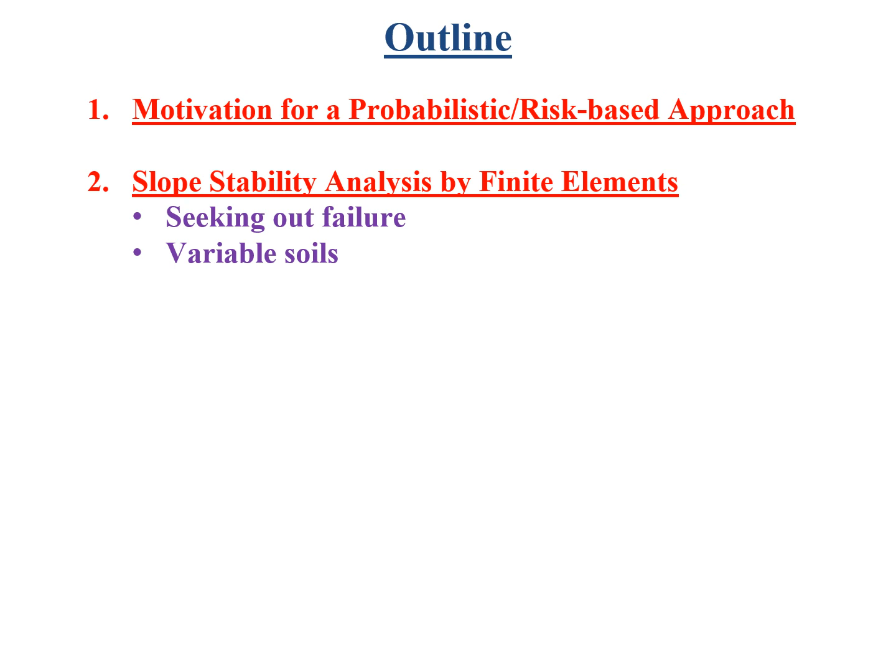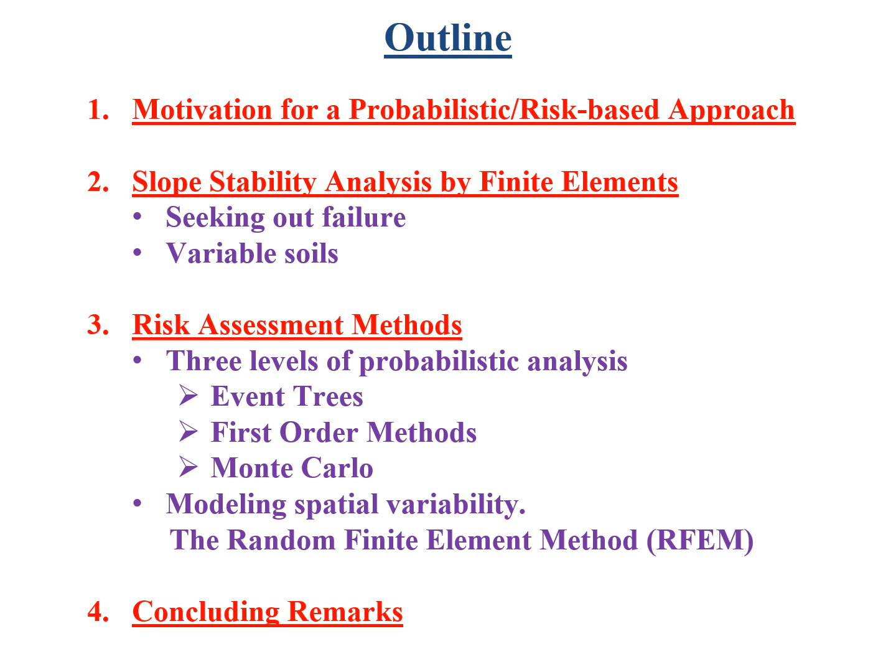And then I'll move on to a review of risk assessment methods in the geotechnical world. I'll probably define what I mean by risk before I start off on this stuff, but I'll identify what I consider three levels of probabilistic analysis, ranging from fairly simple non-mathematical methods through to something you can do on a laptop relatively quickly, to heavy-duty supercomputer stuff. So we won't be talking too much about that. Then I'll conclude with a few remarks at the end.

Juan Pablo mentioned that I spent time as a director of the ASCE, the American Society of Civil Engineers, and it's getting closer all the time, this target date of 2025. This document, which was delivered when I was on the board of the society, came up with what they thought would be priorities for civil engineers in the year 2025.

Maybe this was done about 5 years ago now. Most of it I found a little bit bland, perhaps a little bit lacking in detail, but one of them caught my eye, and I really liked that they recognised that in the future, engineers and civil engineers, all engineers, will have to perhaps consider and manage risk. Not only assess risk, but manage it and deal with it in a scientific way.

Leaders in public policy, well, yeah, we would like more politicians to be engineers, not lawyers, certainly where I live nowadays. The motivation for a probabilistic risk type... did something jump? Oh, this screen is sort of slightly differently adjusted, I think, with the projector.

I dropped off the Géotechnique panel as of the 1st of January this year, but for the very first volume of Géotechnique, volume 1, number 1, they asked Karl Terzaghi to write a preface. He pointed out something we all know but don't often confront explicitly: engineers have to deal with soil and rock where properties vary from point to point. The engineering properties are not uniform, and often we only sample the properties in a few limited places.

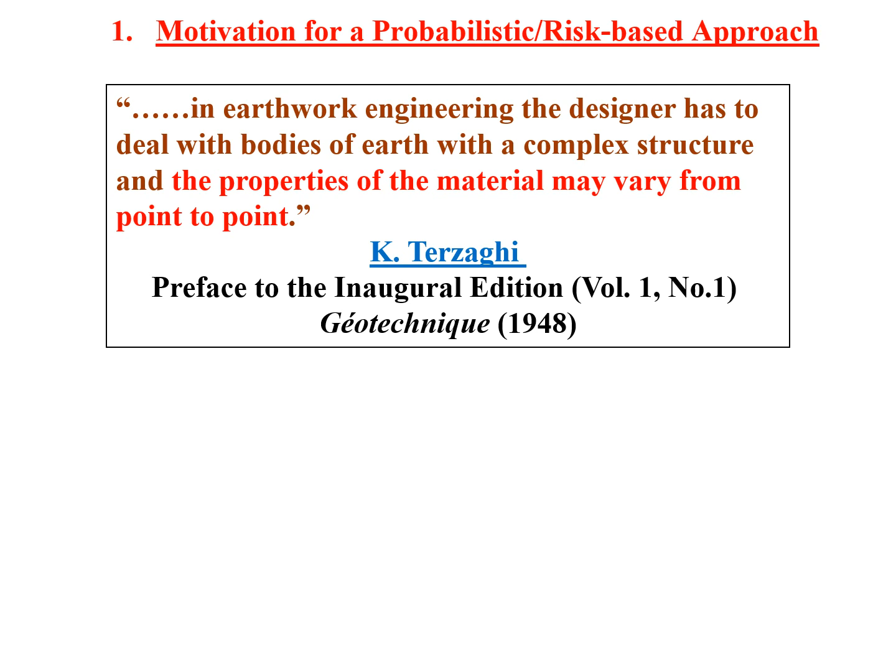The same year, many of you will know of a quite important book by Donald Taylor, from 1948. I don't know if it's a coincidence, but in his introduction he also talks about this variability that we have to deal with in the geotechnical world.

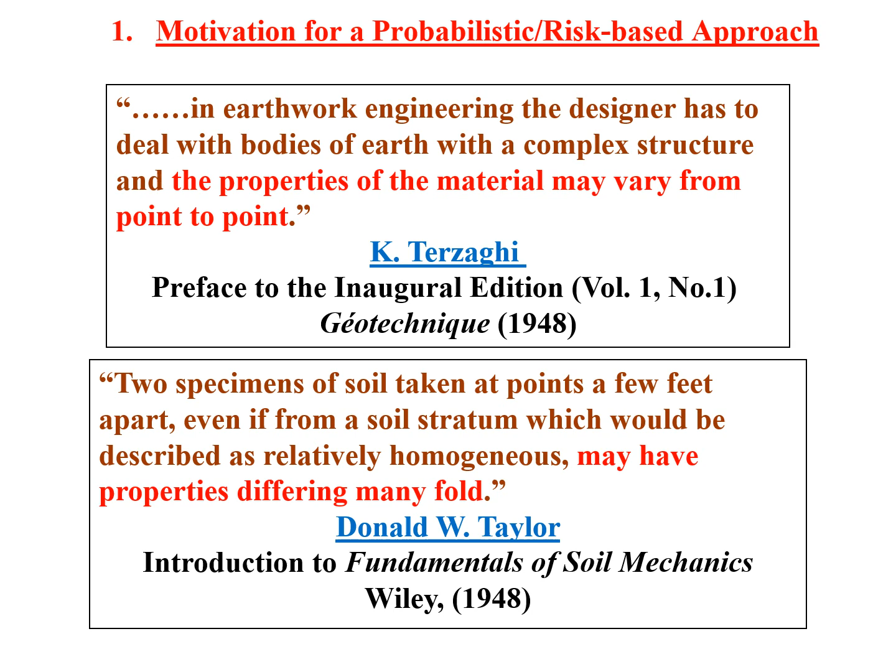I think there was quite a lot of rivalry in those days—it's a small world of geotechnical engineers in the academic business. Donald Taylor never got promoted, even though he has more things named after him, almost as many as Terzaghi, I'd say. You've probably heard of his consolidation methods and his slope stability charts. So it was a pretty tough political world, I think, in those days.

However, in spite of Taylor and Terzaghi's pronouncements, only fairly recently, in the research world at least, have we started to confront these variabilities explicitly through numerical methods. This is a method called the random finite element method, where we model the soil or rock using a finite element mesh, and the properties are defined statistically with a mean and a standard deviation. If you remember your probability and statistics—instead of giving the whole problem a single property, which is traditional geotechnical engineering where we slap a factor of safety on at the end, we'll actually try to explicitly predict or model the soil as a variable material.

This is a bearing capacity analysis which we did some time ago. You can see a grey-scale that somehow represents the strength—I think dark represents weak soil in this picture, and light represents strong soil. It's interesting to see the mechanism goes one way. When we do these things repetitively, sometimes called Monte-Carlo simulations, we very rarely get a bearing capacity failure that does the classical textbook, symmetric thing. It just never happens, because a weak point somewhere triggers the failure to go one way or the other.

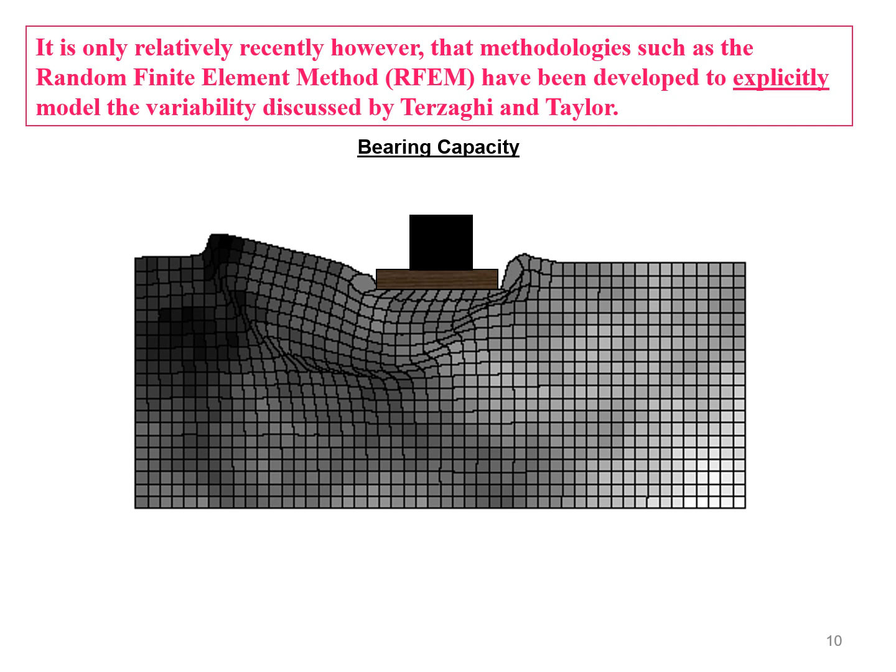I've thrown in a celebrated bearing capacity failure in Canada from a few years ago—106 years ago, actually. This, of course, as we can see, went one way.

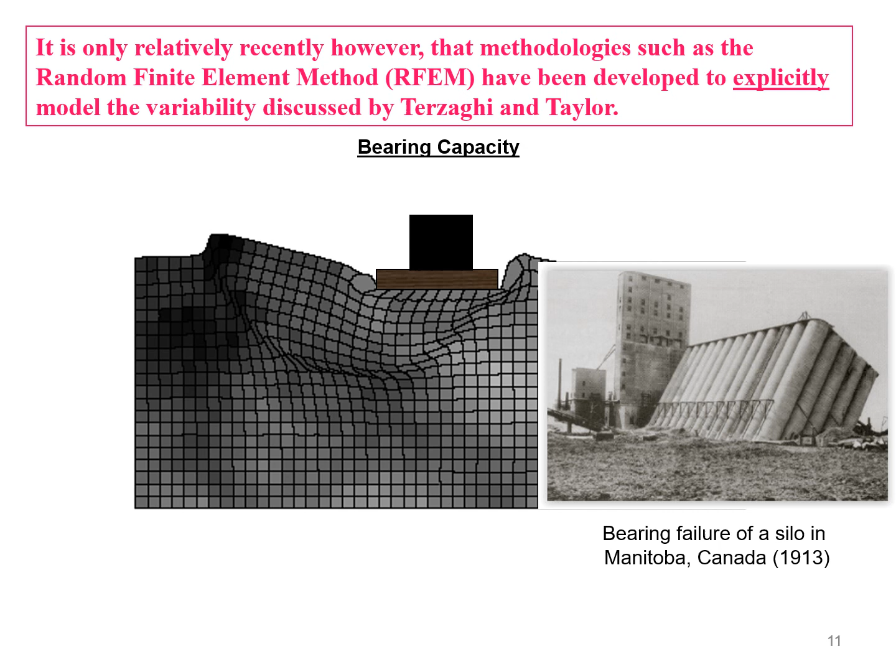Slope stability analysis by finite elements. I want to emphasize perhaps the power of the finite element method here for dealing with this variability that we all know is there.

Suppose we want to calculate the factor of safety of a slope. We can use limit equilibrium methods, methods of slices, or we can use charts—sometimes Taylor's charts—for certain simple problems, or we can use numerical methods like the finite element method. This is how it works; it's very simple and very powerful. You design your mesh to represent the profile of the slope.

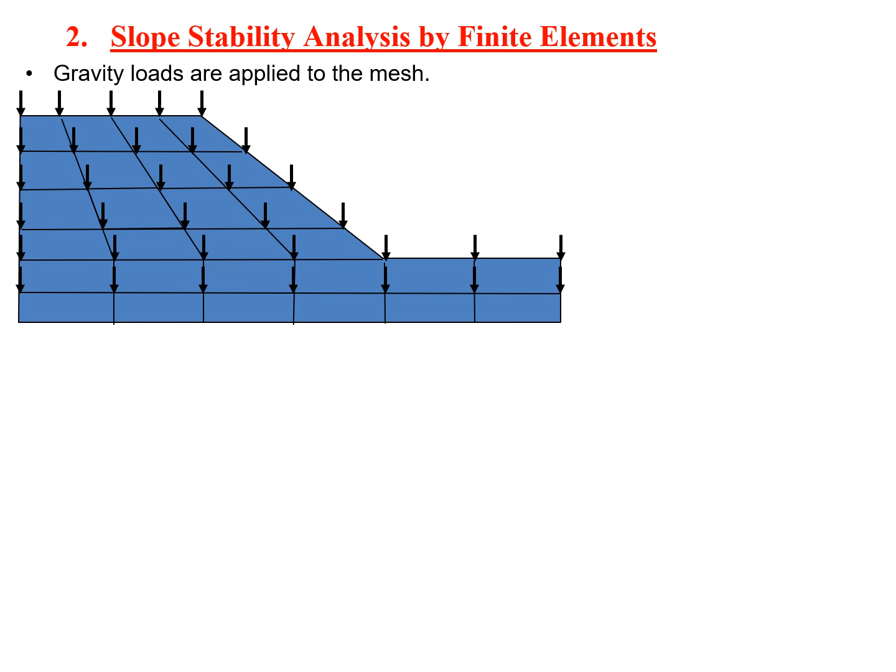It could be a lot more complicated than this, but I've got a simple slope. We turn on gravity, so to speak, since it's gravity that's driving the failure, if there is one. Then we give the slope, the soil, a rather simple stress-strain law—something elastic, perfectly plastic, this would be called. We assume the soil is elastic for a while, and then when it hits a threshold defined by Coulomb—friction, cohesion—it fails.

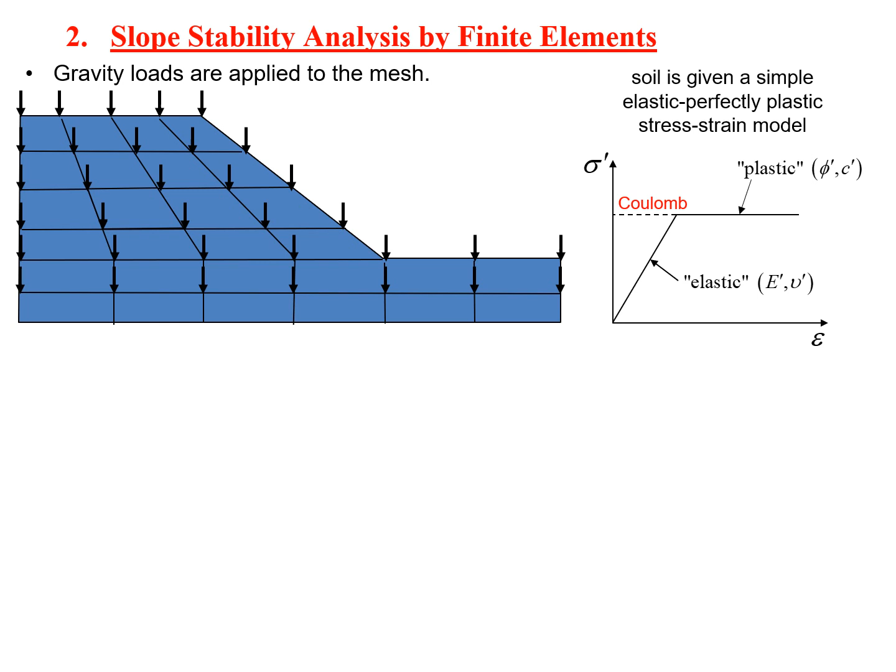So the way this works is we do initially an elastic analysis—we just forget Coulomb, we just do an elastic analysis with Young's modulus and Poisson's ratio. We look at the stress in each element, one at a time, to decide if the stresses generated by gravity have violated Coulomb. If they're above this line, they've strayed into illegal territory. If the stresses are below the line, we consider them still to be elastic, so we're not worried about those.

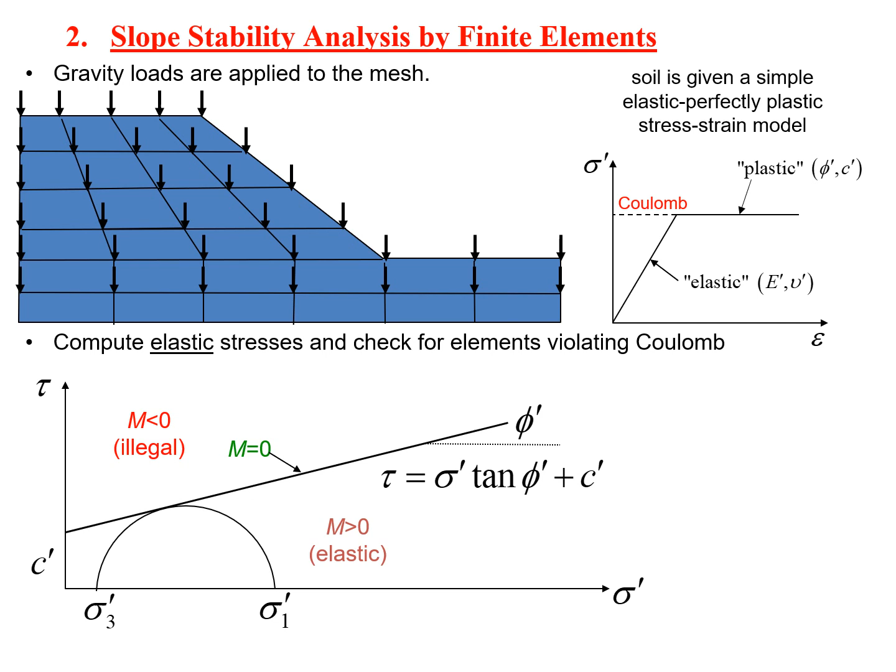So this is what happens: if a particular element violates Coulomb's criterion, negative in this case, then something has to happen. Stresses are not allowed to be in that part of the chart - they've exceeded the strength that is available.

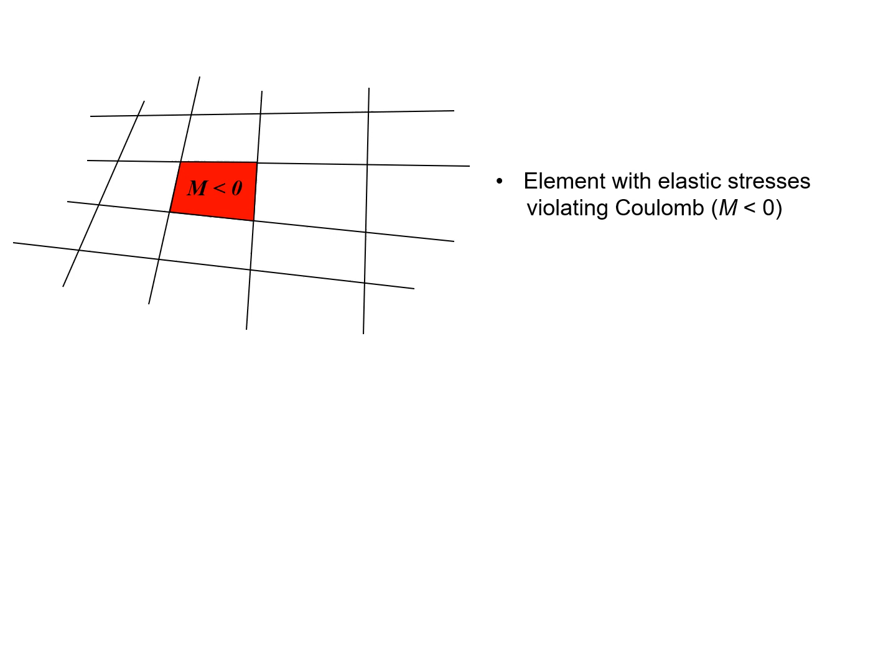So we then turn on a redistribution algorithm that tries to share the excess stresses with neighbouring elements. These are finite elements, each of these little quadrilaterals, and there's a fairly simple bit of programming that says, okay, let's try and get our neighbours to take some of this load.

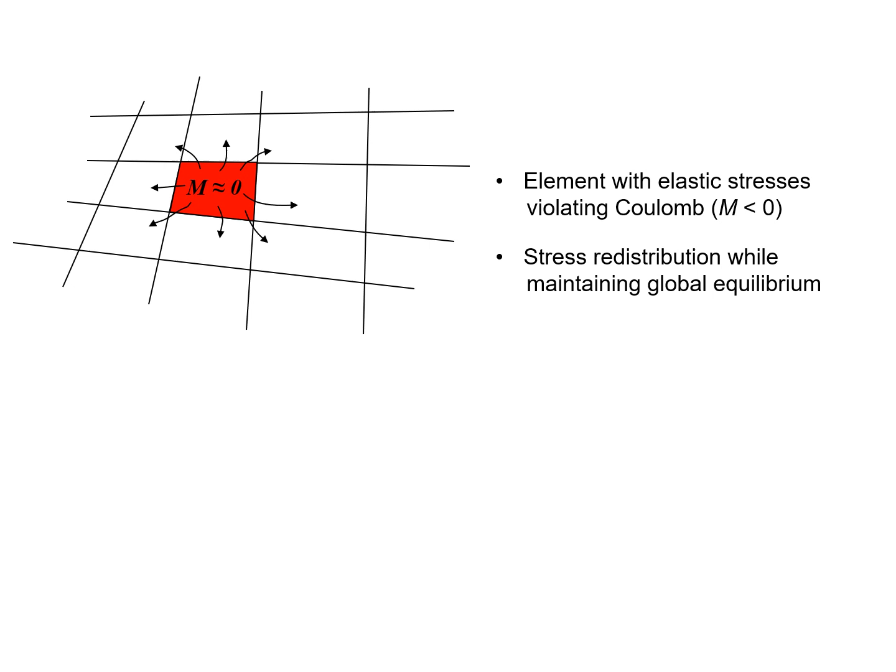In doing so, we may cause the neighbours to fail, in which case they will need another round of redistribution. So it's a redistribution algorithm - we're moving the stresses around, but we're not violating equilibrium. We must still be in equilibrium with gravity, but we're moving the stresses. After a while, hopefully, all the elements have returned back to Coulomb's line within tolerances, and we stop calculating.

To find the factor of safety, we keep gravity constant, of course, unless we're going to Mars or something. We gradually weaken the soil by dividing by something called a strength reduction factor, SRF. So we systematically weaken the soil, and sooner or later the slope's going to fail. Obviously, if you weaken it enough, it will fail.

And when that happens, it's easily shown, I'm not proving it today, but it's easily shown that the strength reduction factor is the factor of safety. What we see in our model is a very sudden increase in crest movement, a sudden increase in nodal displacements. So the strength reduction factor is increased slowly, and suddenly we get this failure - that's the factor of safety.

And we validated it against old, for simple problems - we could check the answers against established results in the literature and elsewhere.

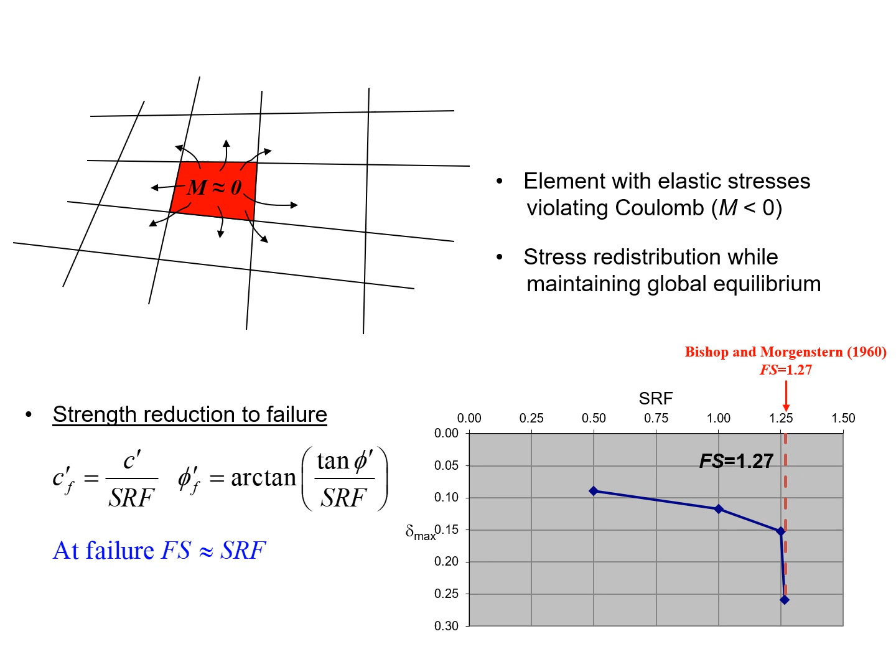The finite element approach seeks out the critical failure mechanism. You don't have to tell it where to look. I didn't have to, in advance, say look for circles going through the toe or tangents at this depth or anything like that. So the mechanism comes out of the analysis naturally.

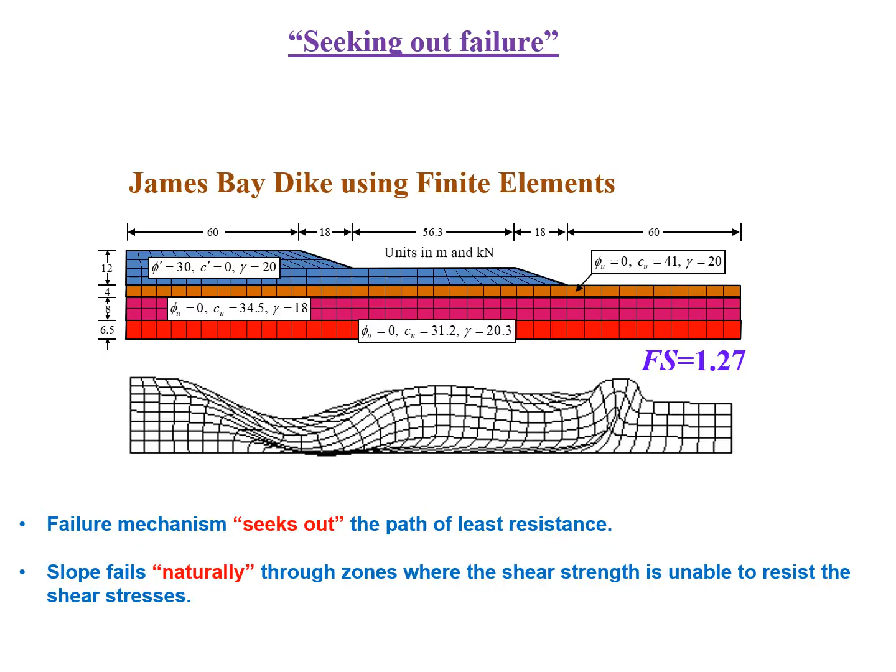A few other examples - this one is a bit more contrived. This is like a two-layer problem with strength reduction. So we're now reducing the strength of both of these layers at the same time until something fails.

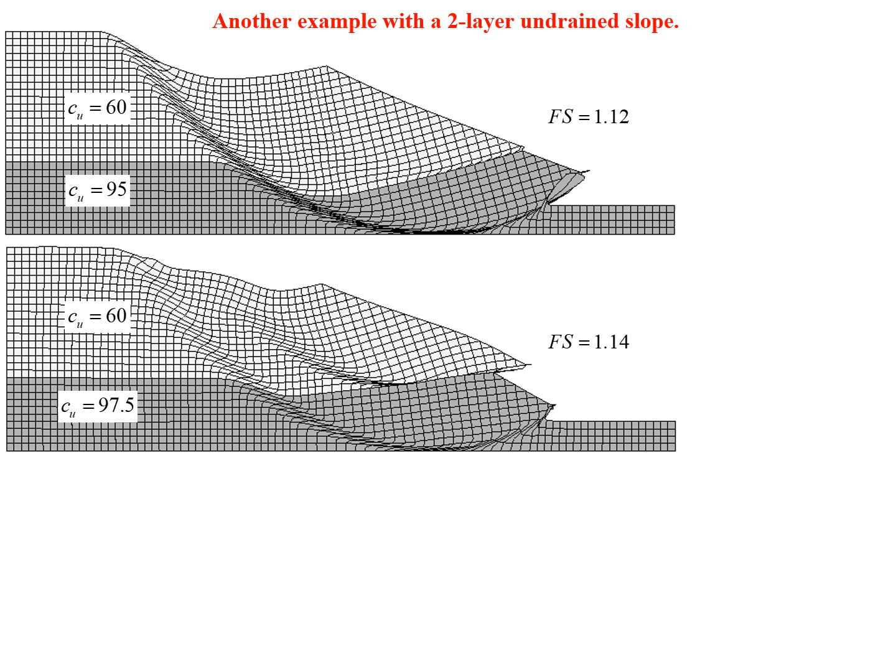If we increase the strength of the lower soil a little bit, and obviously I've chosen my numbers carefully to give this answer, but you can see we have two mechanisms with the same factor of safety - the shallow one and a deep one, both with a factor of about 1.14.

If I increase the strength of the lower soil once more, then essentially the mechanism no longer wants to go deep. It's harder work to get through that lower, stronger material, and it stays shallow.

My point here is the finite element analysis, and by the way, it's a program downloadable you can all have if you're interested, does this.

It naturally gives you those mechanisms. I didn't have to tell it to look for them. Just when I finished the run, I looked at the graphics and we see.

I do ask the question here: would a limit equilibrium method have found both those mechanisms necessarily? I think maybe in the hands of a very experienced practitioner, but I think most conventional slope stability analysis would have found one of them and said, hey, that's it, we've got the factor of safety, without realizing there's another equally likely mechanism of failure lying underneath.

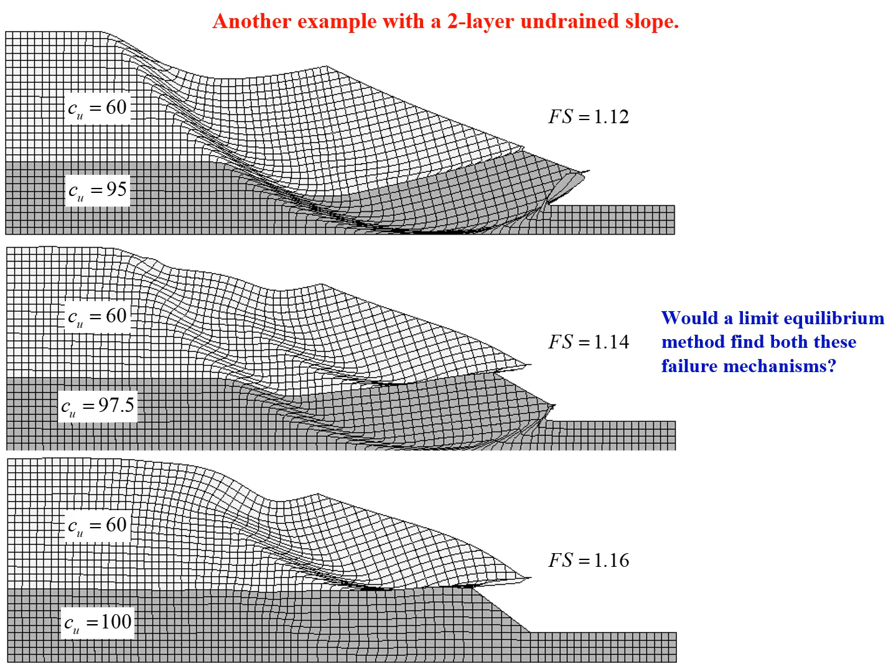When you get back into this random world of soil properties, which is much more variable than our little simple layered problems, we really have no choice but to go to numerical methods, because the mechanisms can be quite wild sometimes as they seek out a path through the weak soil.

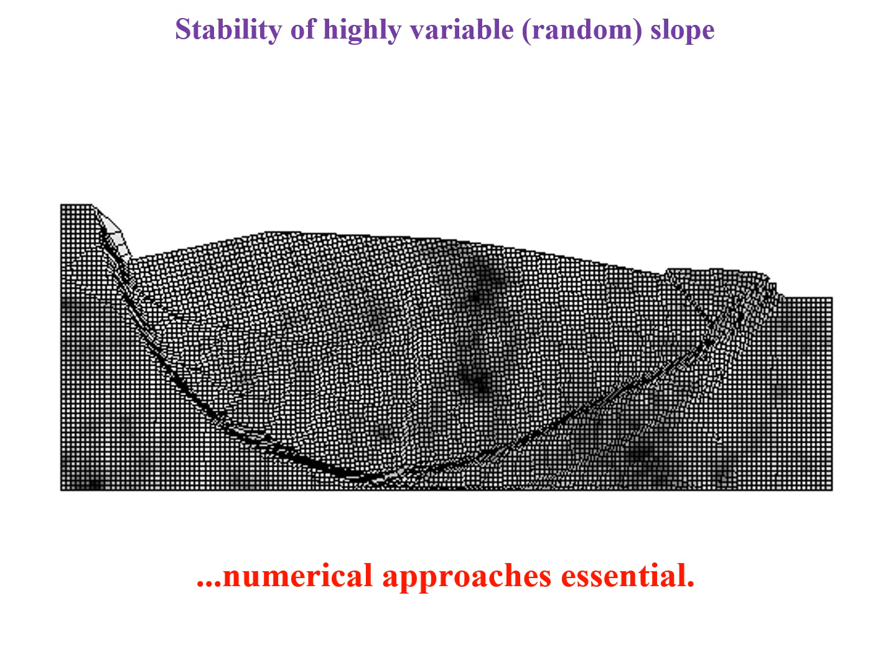Okay, so that's a little bit of background on slope stability by finite elements. Now, why would risk assessment, what does it add to the conventional approach?

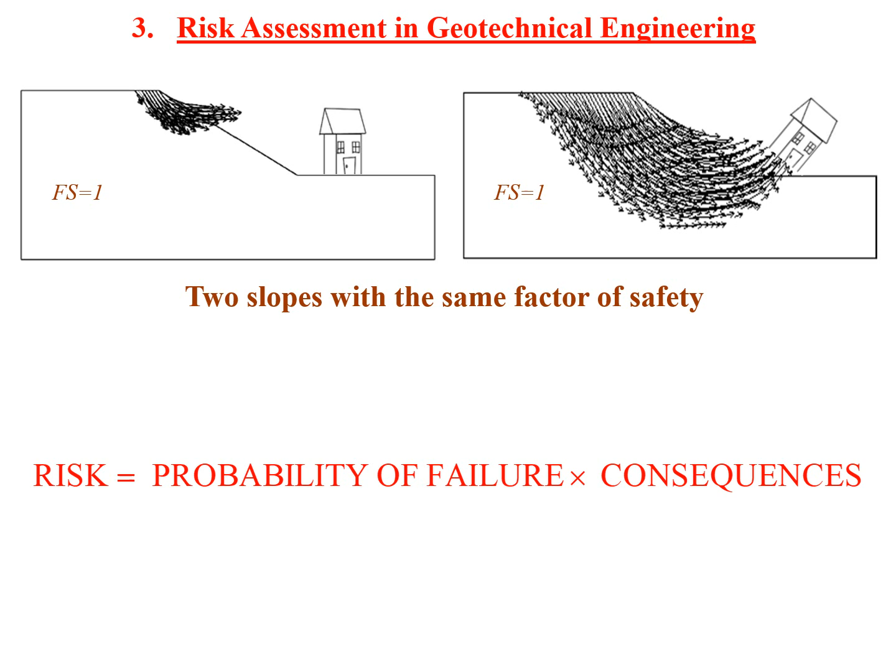Well, here's the conventional approach to slope stability analysis again. Two slopes, both have the same factor of safety. Both slopes have failed, both have a factor of safety of 1, but one is obviously much more damaging, potentially hazardous to the people living downhill, which raises the issue of consequences of failure. Clearly, the consequences of the right-hand event are much more serious in terms of cost, lives, potential loss of life, and so on.

So here's my definition of risk, a very simple one. It's essentially, risk is the probability of failure weighted by the consequences of failure. So, if the consequences are serious or very severe, we can only tolerate a much lower probability of failure. If the consequences are not so severe, we can tolerate a higher probability of failure. It makes perfect sense. The thing is, the probability of failure of anything is rarely equal to 0, and we always have to recognize that failure is possible, and we have to manage that level we could accept based on consequences. Consequences are going to be very site-specific. I can't just put in a textbook somewhere an acceptable probability of failure for a slope or a retaining wall or a foundation. It depends on what the consequences would be if that thing failed.

What is acceptable risk? This is a topic that I daren't touch on today, and I think it's a very difficult one to tackle. It's a different lecture entirely. Acceptable risk is something that perhaps society will have to buy into. How much are we willing to pay to reduce risk? What can we live with?

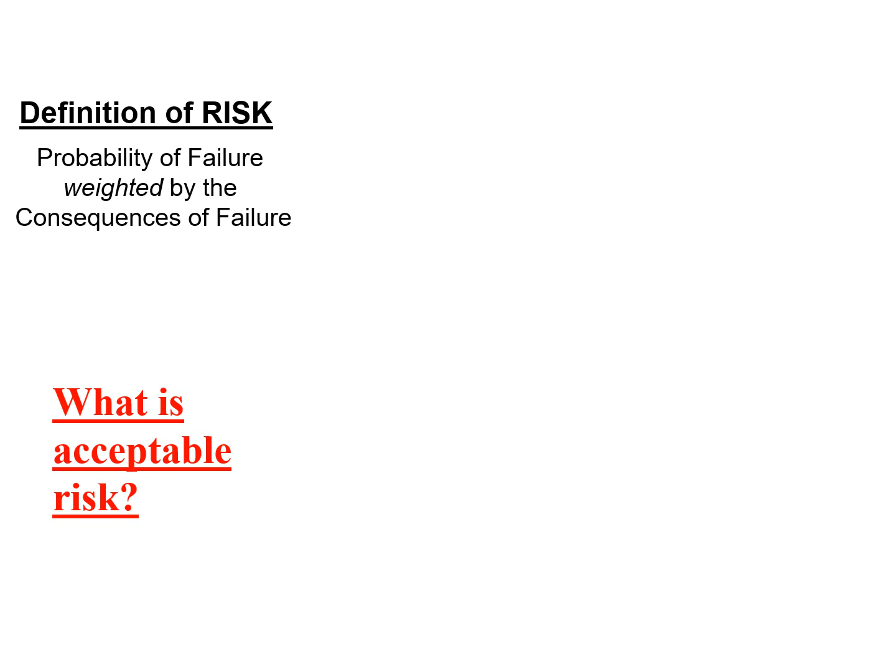Just to give you an idea of how this idea of risk pans out, this is a historic graph. I hope you can just about make it out. Baecher, in 1982, claims he developed this chart based on earlier work that was unpublished by other people. He doesn't want to take full credit for it, but it's one of the earliest publications of this type.

Along the x-axis is, in this case, dollars, cost of repair, infrastructure damage, and so on, and of course it's 1982 dollars. Up here is an acceptable level of probability of failure. So the y-axis is probability of failure, the x-axis is lives lost, dollars cost, and the top axis actually is lives lost, which raises another interesting controversial issue of how much is a life worth.

I didn't plan to get into this one, but if you Google it, you'll find a huge bibliography on this topic. I suppose when I mentioned it, the lives lost goes into logarithmic scale, you've got a tenth of the lives lost here, so I wonder what that is.

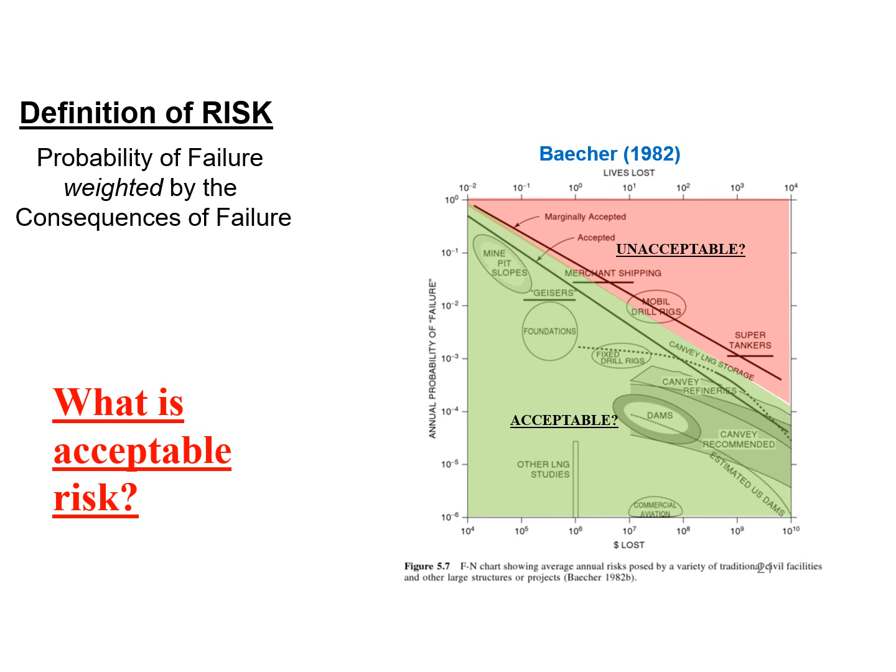So, it's broken arms. But these black lines are Baecher's chart, somehow defining the cut-off between what might be unacceptable and what might be acceptable for design. Unacceptable is high cost of repair and high probability of failure. Those two obviously don't go together. If the cost or lives lost potentially is very high, you've got to target a much lower probability of failure. Now this graph has appeared in many different forms from different agencies, but they all have a similar idea of diagonal lines going from the top left to the bottom right.

So a risk assessment study involves probability and consequences. I'm going to talk more about probability today for the rest of this lecture because the consequences are going to be much more site specific. How do we estimate probability of failure?

The probability of failure is somehow an alternative to the factor of safety. I think right now it's more of a complement. Nobody's going to abandon the old ways of doing things because they've served us well and generally safely. But the probability of failure, I think, is a more scientific way of thinking. The factor of safety is just an abstract number - it doesn't mean a great deal other than it's higher than 1, and you feel good about that.

But actually the terminology in the literature, in my experience, is quite variable. Some people would prefer not to talk about failure if it's, say, the probability of differential settlement under a building - something that's not terribly high consequence. We might talk about the probability of inadequate performance or the probability of design failure. Some more optimistic people prefer a glass-half-full way of thinking: reliability, or the reliability index.

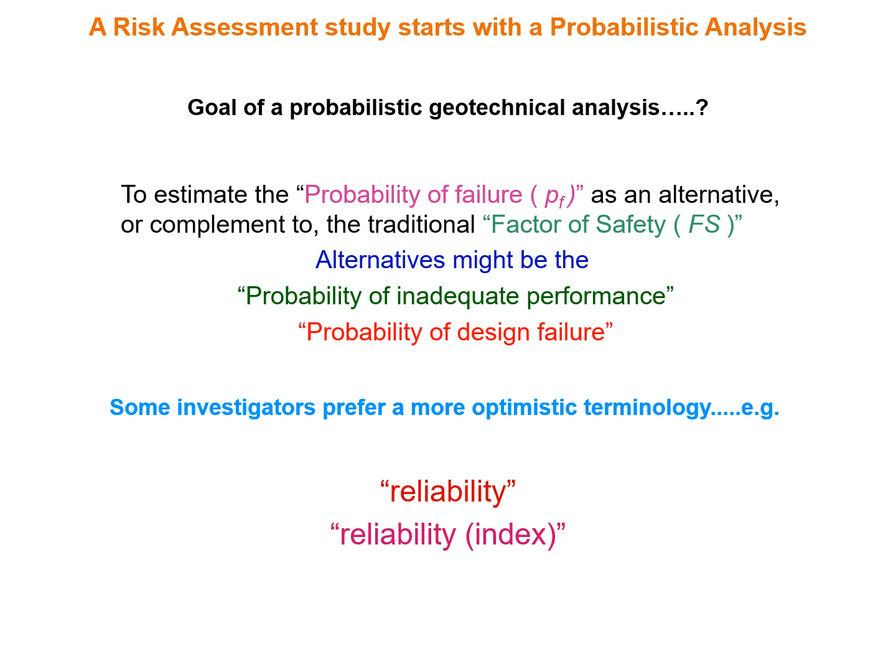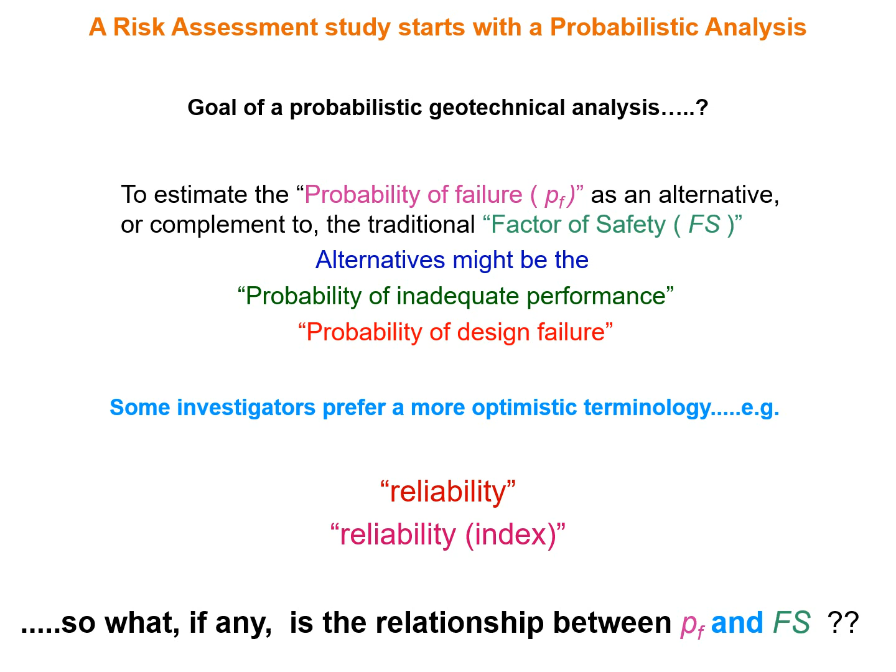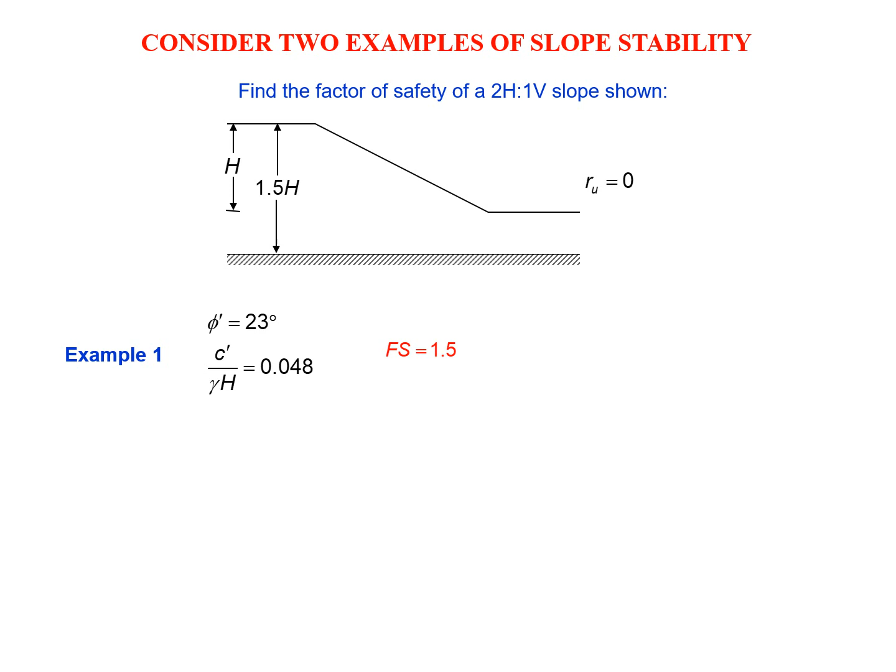So what, if any, is the relationship between the probability of failure and the factor of safety? This is a dangerous world to get into trying to compare these things. But I've got two slopes - this is a very famous example, you may have seen it before elsewhere. I took a simple slope and analysed it twice.

The only difference between example 1 and example 2 is that the friction angle is higher in example 2. Cohesion is dimensionless in this case, but the cohesion is constant, the geometry is constant, friction is higher. Not surprisingly, you don't need finite elements for this one - you can look up charts, take your pick, there's lots of choice out there. The second one, not surprisingly, gives a higher factor of safety. No one is going to be remotely surprised to hear that.

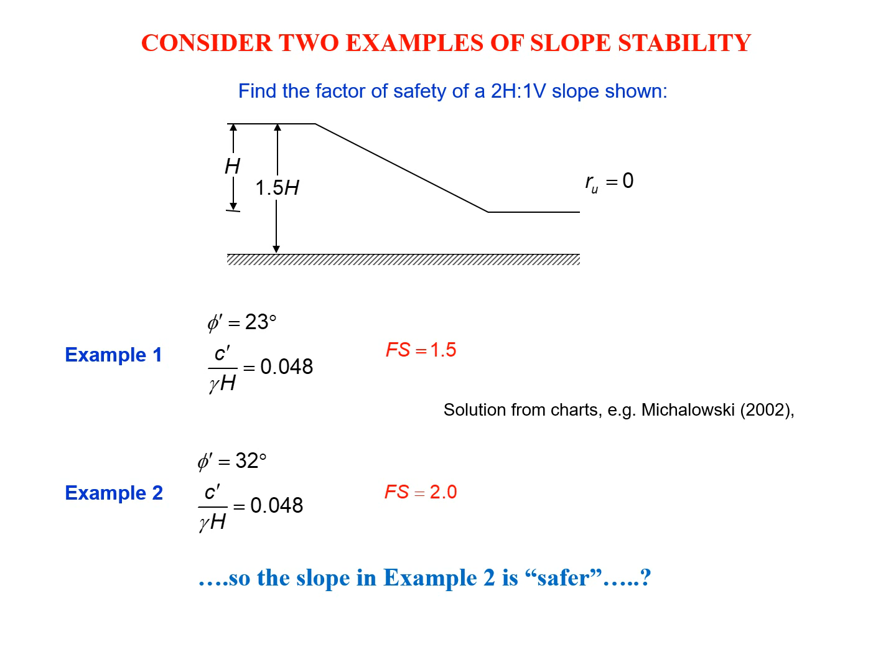And so, in conventional thinking, slope 2 is safer. You probably already guessed this is a trick question. Let's say someone goes off and says, hey wait a minute, this soil in this slope is not constant - it does not have a constant friction angle, it does not have a constant cohesion, it's variable.

And they do some analysis, a probabilistic analysis, which I'll mention briefly later. Following a probabilistic analysis, we come up with some more information about the variability of the soil properties. Some analysis has shown, for example, that example 1 has a mean factor of safety of 1.5 and a standard deviation of factor of safety of 0.18. I'm guessing you remember enough about your probability statistics that the standard deviation is a measure of the spread of results - how dispersed they are.

So really what this is saying is that the mean factor of safety is indeed what we calculated using charts just before. Example 2 gives a mean factor of safety of 2 and a standard deviation of factor of safety that's rather higher - significantly more spread out.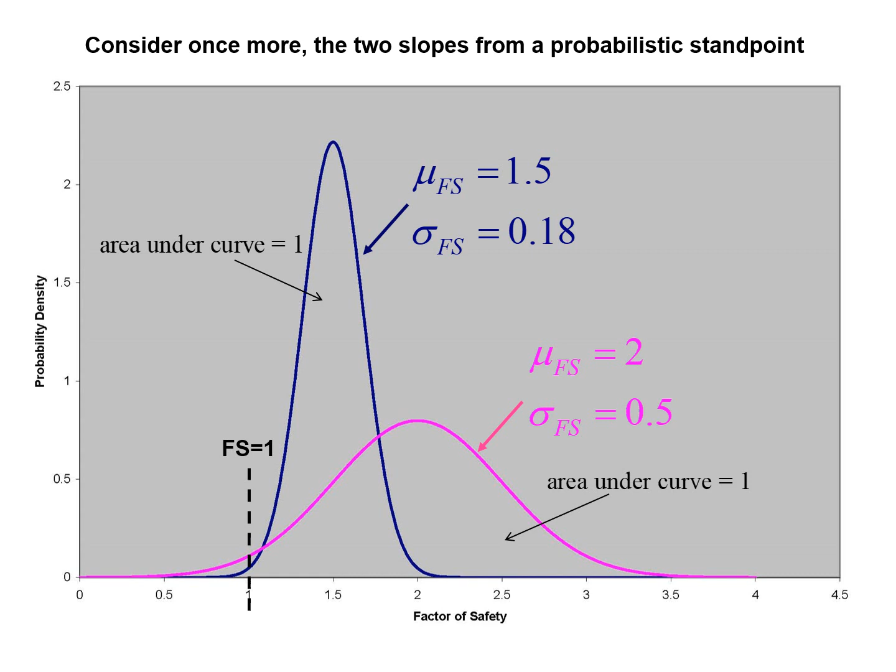And here's example 2, which is flatter and more sort of squashed out. If these curves are drawn properly - and this is quite important - the area enclosed underneath them is equal to 1 unit of area. This makes it rather convenient to calculate probabilities as areas. So the probability, for example, of the factor of safety being less than 1, which means failure, is the area of these curves to the left of the factor of safety of 1.

You can probably see what's coming. If I just look at a detail of that corner, we can see that the blue line, which has the lower factor of safety, has a smaller area - which means a smaller probability of failure - than the so-called safer slope, which is more flattened and has a higher probability of failure. So we get this counterintuitive result that's a bit unsettling in many ways: the safer slope has a higher probability of failure.

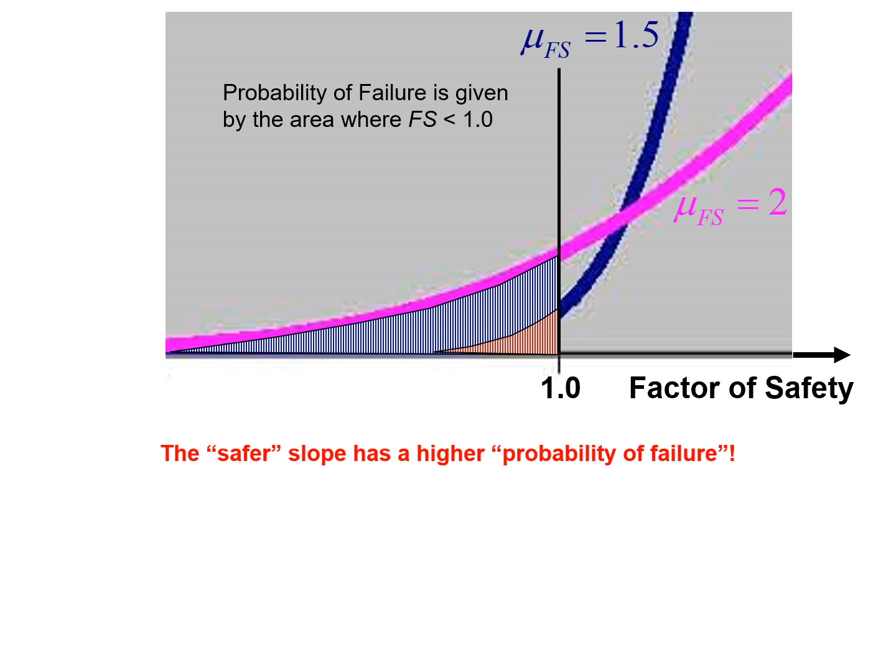Now, this is a contrived example, deliberately to make a point here. And the point is that direct comparison between the factor of safety and the probability of failure should be done with great care. In fact, they're apples and oranges. A factor of safety is a single number - factor of safety is 1.5. A probability of failure depends on at least 2 numbers, a mean and a standard deviation.

So I regularly see people writing papers where they're comparing probability of failure and factor of safety. And one has to say, well, you need a lot of small print caveats here to explain under what circumstances you're doing that.

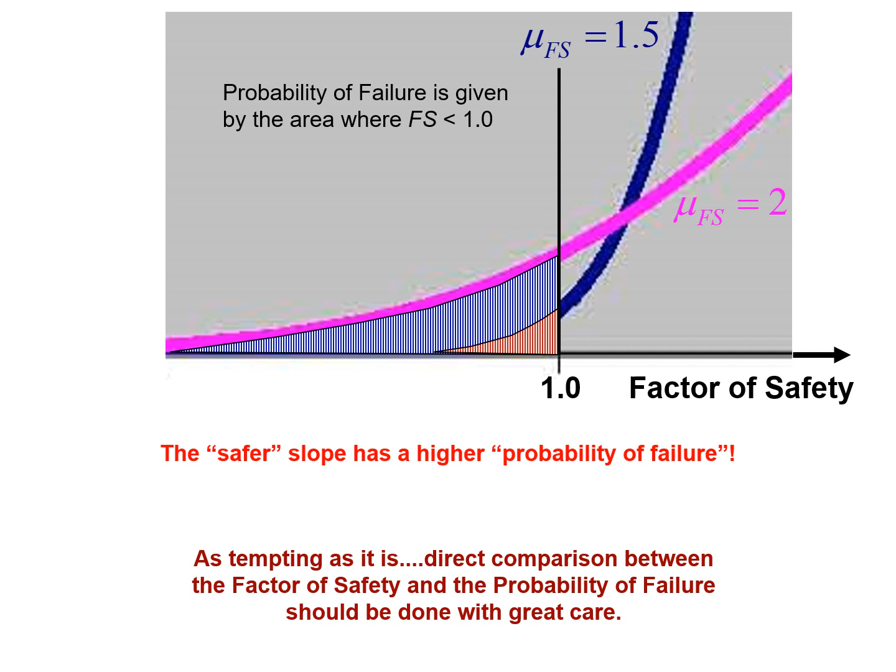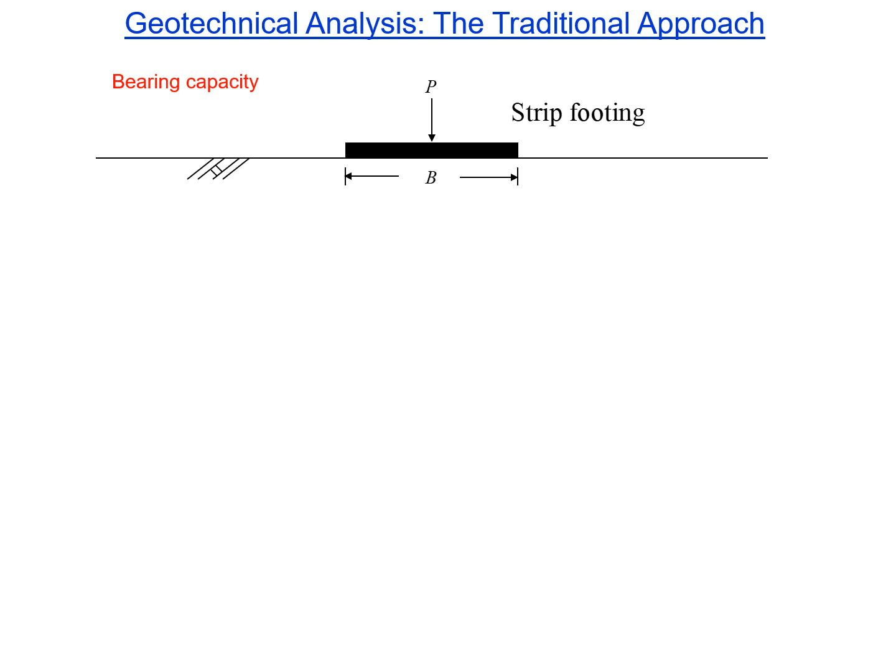How do we calculate this factor of safety? How do we calculate this probability of failure? Let's recap using that bearing capacity problem - a classical soil mechanics undergraduate problem.

So we have the traditional approach, visible at the top here: a footing with soil with certain friction and cohesion, chosen conservatively in some way with characteristic values. We plug them into a formula like Terzaghi, we calculate the bearing capacity, look up the bearing capacity factors, get the calculator out, and we work out Q-ult.

Then what we do is divide by 3 or something like that, a typical factor of safety for a bearing capacity problem. We end up with an allowable value which would be given to structural engineers - okay, you can safely apply this pressure to our footing. That's the traditional approach.

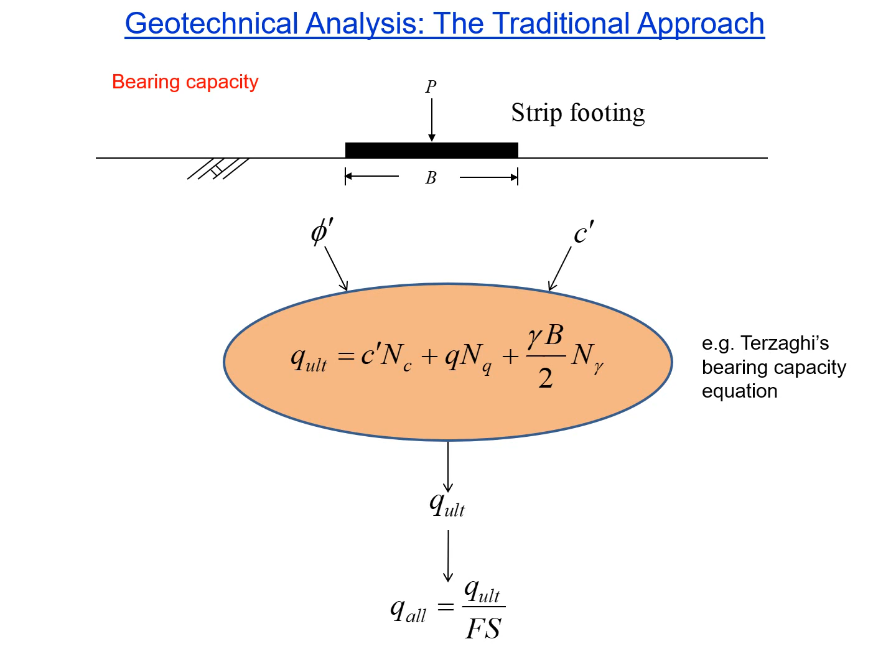We're still going to use Terzaghi. We don't want to change the models we've been using - not now anyway. But now we might need means and standard deviations from the book. We want to know how variable these properties are coming into the formula. And in here we have a probabilistic method.

We'll mention briefly one or two ways of doing that. But instead of calculating the bearing capacity like we did in the previous slide, there's a couple of other things here - we're now going to calculate the mean and the standard deviation of the bearing capacity. So probabilistic stuff coming in, probabilistic stuff coming out.

These blue comments are for a somewhat more sophisticated analysis. For example, cross-correlation says that these variables coming in may not be entirely independent of one another - they may be correlated in some way.

But spatial correlation recognizes that soil properties, if you take two samples in a field that are close together physically, are more likely to give you similar properties than if you take boreholes in opposite corners of the field. So the stratification, the depositional history, tends to give you a spatial effect. But these would be reserved for a more advanced analysis.

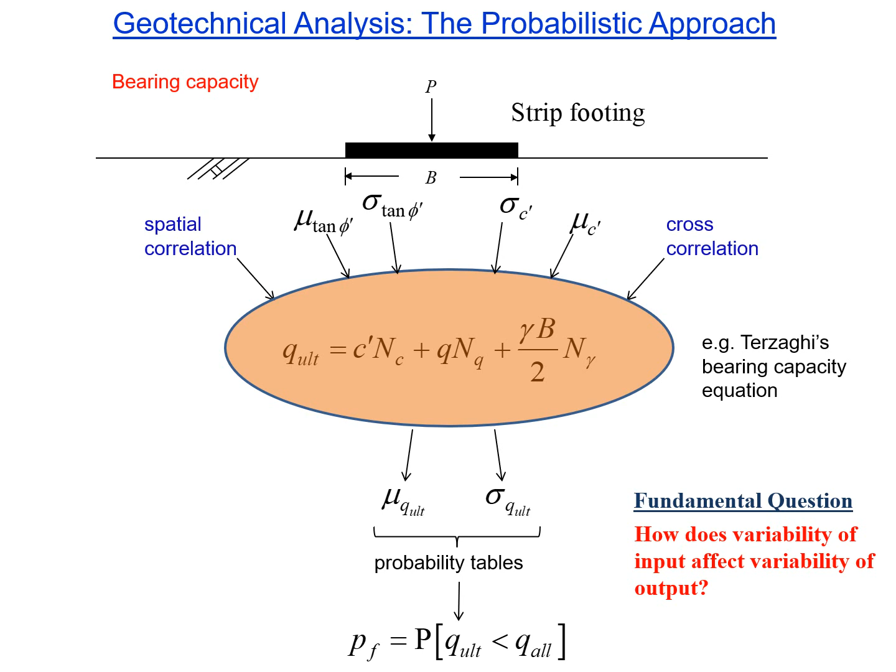So here's the key thing for any probabilistic analysis, I think: how does variability of input affect variability of output? Where do these means and standard deviations that we use come from?

That's a good question, because geotechnical engineers are always complaining we don't have good enough site investigation, right? Today, how on earth are we going to get standard deviations? Well, of course, there's no substitute for a good, thorough site investigation where you have enough data to actually calculate a standard deviation. But in the absence of high-quality data, we would initially recommend resorting to what we might call typical values of variability in different soil properties.

There's a growing bibliography of this. If anyone's interested, I have a list of papers and books and things that just give you a ballpark feel for how variable different properties are.

This is actually a very good, very pioneering work from Australia, this book called Lee, White and Ingles. But there are more recent ones, long lists of properties and typical ranges of variability.

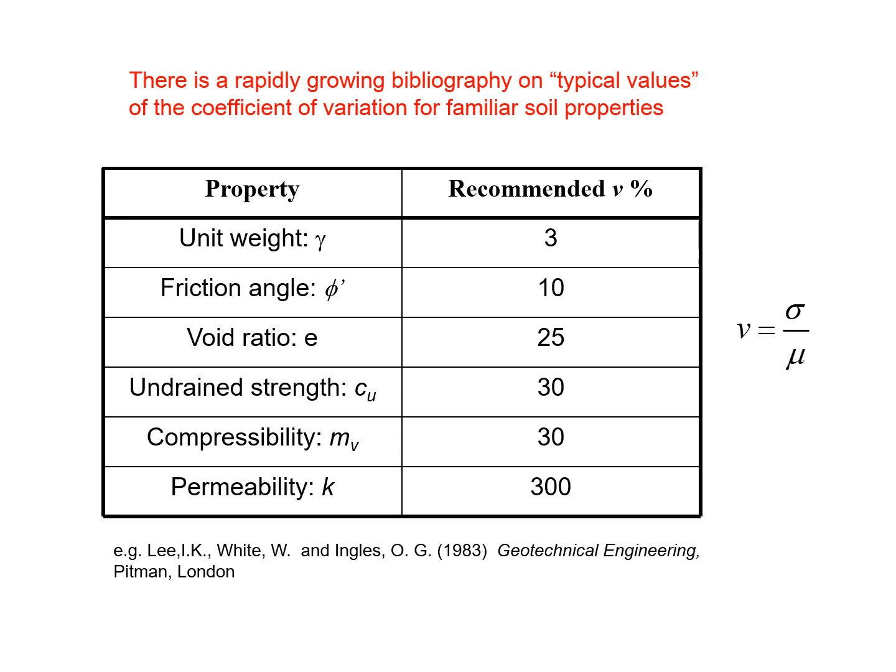I'm going to talk about three levels. One, called an expert panel. This is where a group of experienced engineers and scientists related to the project sit around the table and construct something called an event tree. I'll show you a very simple one in a minute. An event tree involves these experts trying to assess what they think the probability is of various things going wrong in a design. It sounds subjective, but it's actually based on many years of experience. These people should be seasoned engineers with lots of training in their discipline.

A powerful and very simple method that involves a little bit more calculation. The first one involves no mathematics at all, really, based on experience. And this is the one that's in state of practice, largely. Just down the road in Golden, Colorado, there's the US Bureau of Reclamation, responsible for hundreds of earth dams, mainly west of the Mississippi. Corps of Engineers have tended to be more east of the Mississippi, but they're regularly doing event tree calculations on existing dams re-evaluated for liquefaction risk and things like that. First order methods are becoming fairly routine. This involves a laptop or a calculator that can take a few seconds, but involves some calculation and delivers the probability of failure of the design.

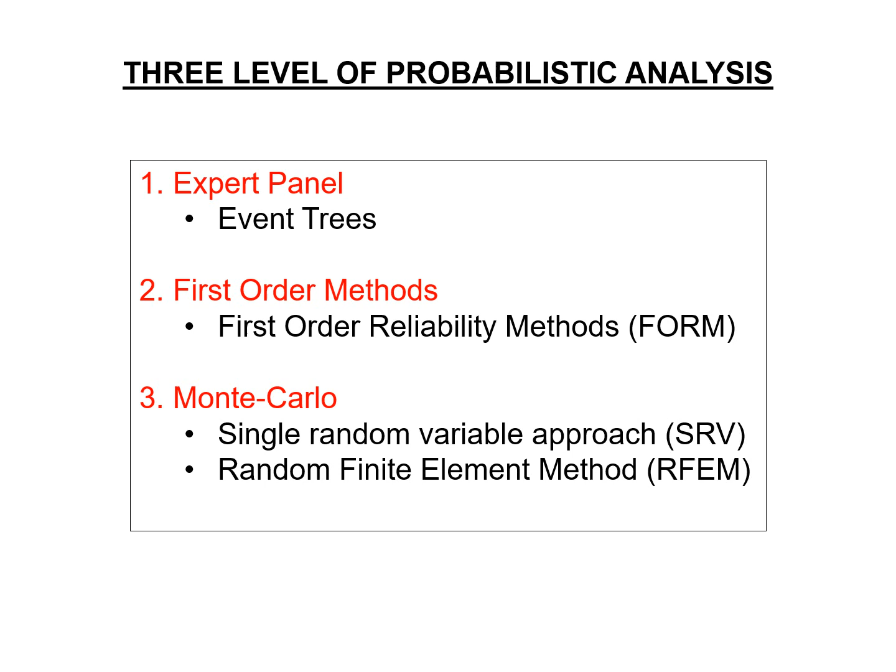FORM. And the third one is the Monte-Carlo family of methods, where you just crank the handle over and over again with variable input. You keep on calculating until the output quantity you're interested in starts to settle down statistically. You've done it enough times that your output is starting to stabilize. I'm just scratching the surface here, but this is a simple Monte-Carlo—I'll show you a quick example of that. And then this so-called random finite element method I mentioned at the beginning is also in this camp, but involves a bit more computational effort.

So, expert panel. This is one I pinched from the Bureau of Reclamation in Colorado, but I edited it a bit to take out a few names and things. This was actually a re-evaluation—sorry, the writing's a bit small—of an old dam, maybe 80 years old, in the northwest. They were worried about a liquefiable layer existing under this embankment, and the danger of an earthquake coming along and causing liquefaction.

So the panel sat down and tried to thrash out the things that might happen and the things that might go wrong. Just to give you a quick flavour, the starting point, the red blobs are bad things happening. If all the red blobs join up, then you're in trouble. The first question they ask is, based on some limited site data, what is the probability that the layer of liquefiable material is continuous from upstream to downstream? They decided there was a 70% chance that yes, it was a liquefiable layer that potentially existed underneath this thing.

No, 30%. This is called a tree because you've got branches coming off branches. One golden rule of an event tree is that the probabilities on all the branches must add up to 1, or 100% in this case. So you must cover all the bases and make sure you've got every possibility, and if the questions are reasonably simple, to be a yes or a no.

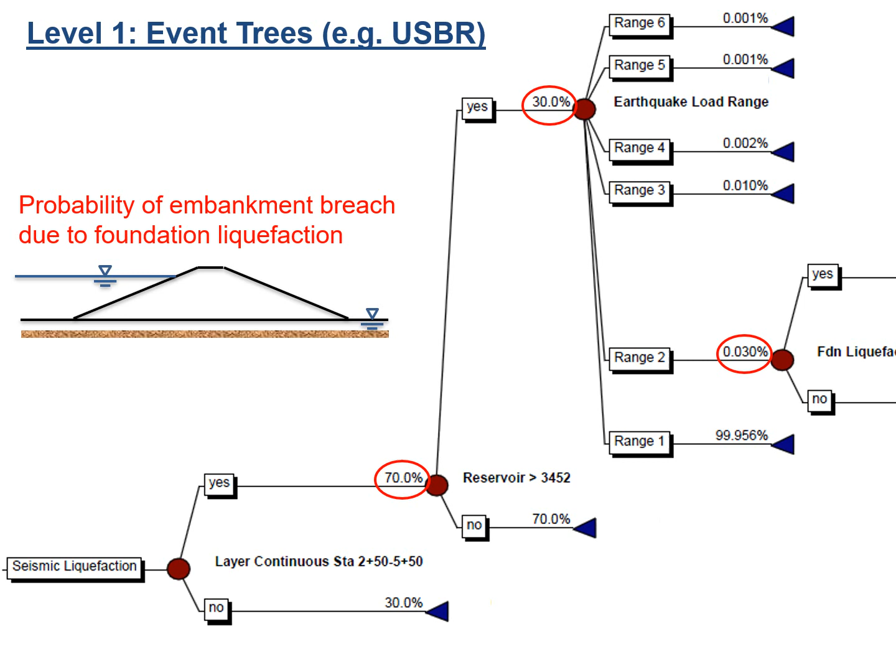An earthquake in Washington State, which gets earthquakes, but it wasn't a particularly active area. And then these are the circles. Then they said, well, will that layer liquefy? Maybe it won't liquefy just because there's an earthquake.

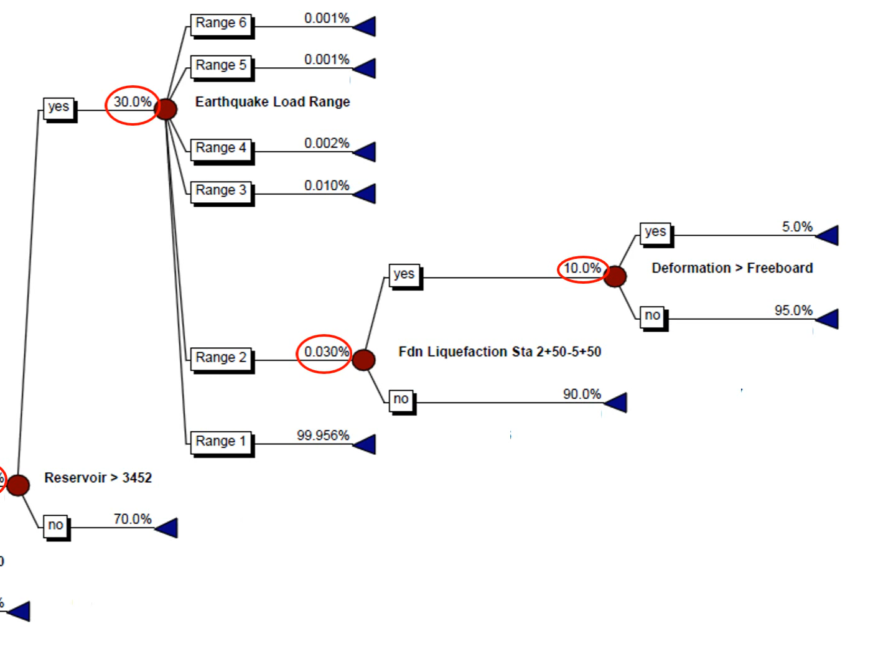Finally, here is my truncated version. If everything bad happens at the same time, then what's the probability that the crest will deform more than the freeboard of the reservoir, which would result in a release of water? So that was considered to be 5%.

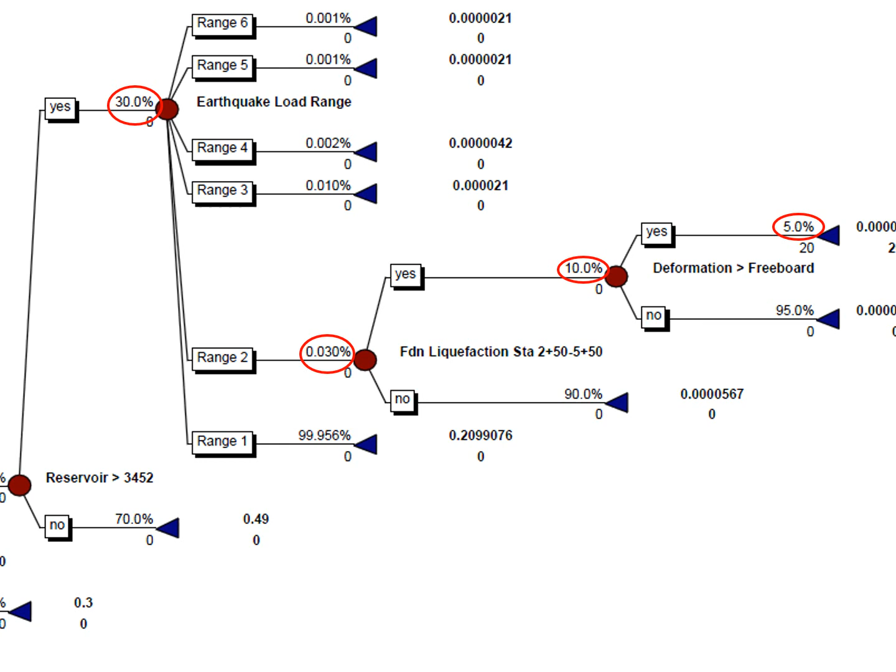So this actually was a much longer thing that I cut down. At the end of it all, assuming all these events are independent of each other, which is a statistical term, but if they're all independent, then the probability of failure of overtopping is just the product of all those numbers circled in red. Just multiply them all together.

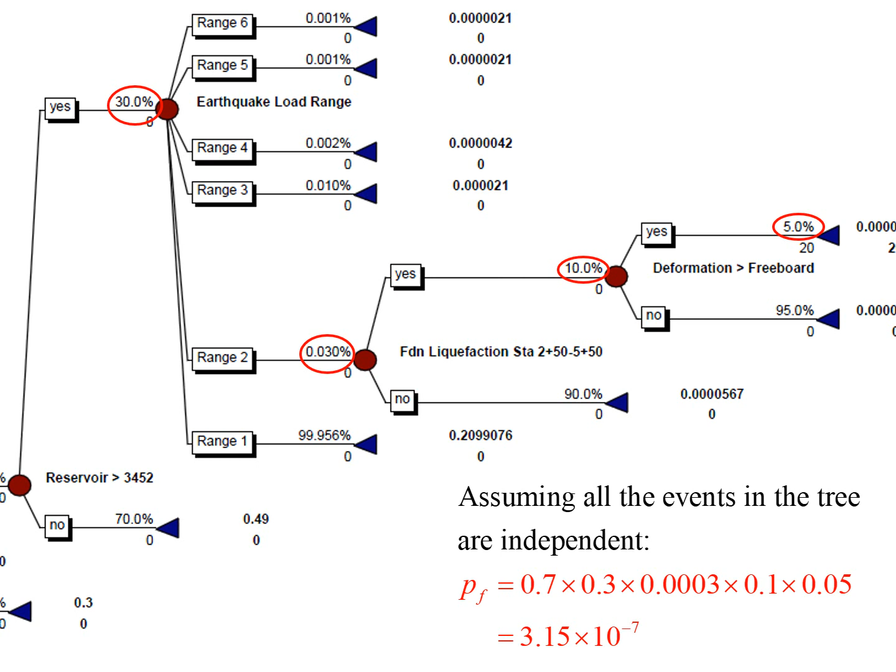You shouldn't really use percentages, it's better to use absolute numbers, so I'm not using percentages up here. But in this case the number was very small, and I think this would have been quite acceptable to them at the time. By the way, I don't really take much credence in these numbers here. Nobody can possibly nail it down. But that's the most important number. If some design changes that number to -6 or -8, then we're already onto something. So this methodology is very much used in practice to estimate probabilities.

Second, first order reliability, and I realize we've run a little short on time, so I'll push on. First order reliability method is based on - I've used Excel on my laptop. Again, the programs are downloadable if you want to play with them. This is the bearing capacity problem.

Without going into some of this stuff, I'm saying that the Q allowable for this footing must be 300. You should not apply a load of more than 300 kilopascals in this case, Q allowable. However, the properties here are variable. Unit weight I'm not going to deal with - that's pretty constant compared to some of these other properties. So cohesion and friction are going to be treated as random variables with means and standard deviation.

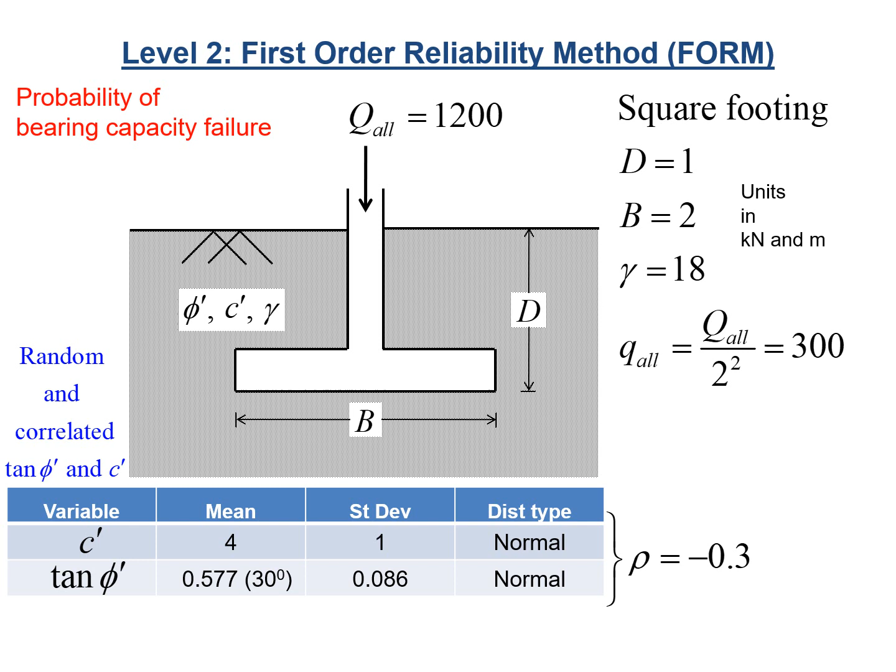Distribution types, well, lots of choice here, but we'll stick with normal, the nice symmetry. So I've also thrown in some cross-correlation just for fun, but some people think that the friction angle and the cohesion are negatively correlated. That's controversial. That is to say, when the mean of the friction angle is high, the mean of the cohesion tends to be low, and vice versa. Maybe some data has suggested that.

So our main question today is: what is the probability of the bearing capacity of this footing being less than 300? If we're unlucky enough to have weak soil that happens to lie underneath this footing, that would have to happen. By the way, a conventional Terzaghi calculation based on the mean values would imply, in this case, a factor of safety of 3.6 - just plugging these into Terzaghi's bearing capacity equation and dividing by 300.

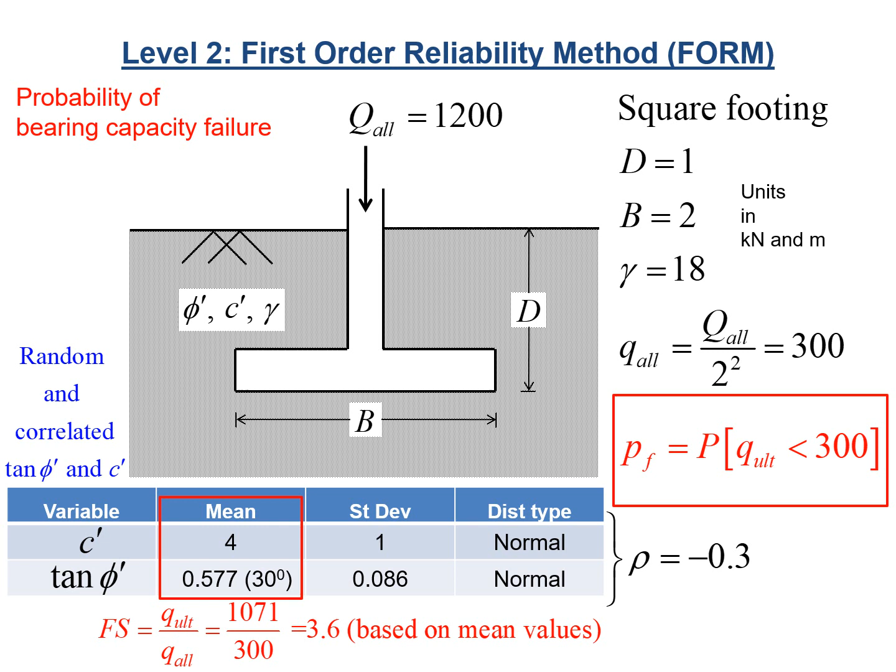So this is the first order reliability method. This is how it works. Previously we had a nice normal curve that was just on a piece of flat paper. Now with two random variables, namely the cohesion and the friction at the same time, you get a hill - it's the kind of three-dimensional version of a normal distribution.

The top of the hill is the most likely value of the cohesion and the most likely value of the friction angle. As you move down to the tails, you might get a cohesion with a very small number, but it's sort of unlikely you get out into the tails of this hill.

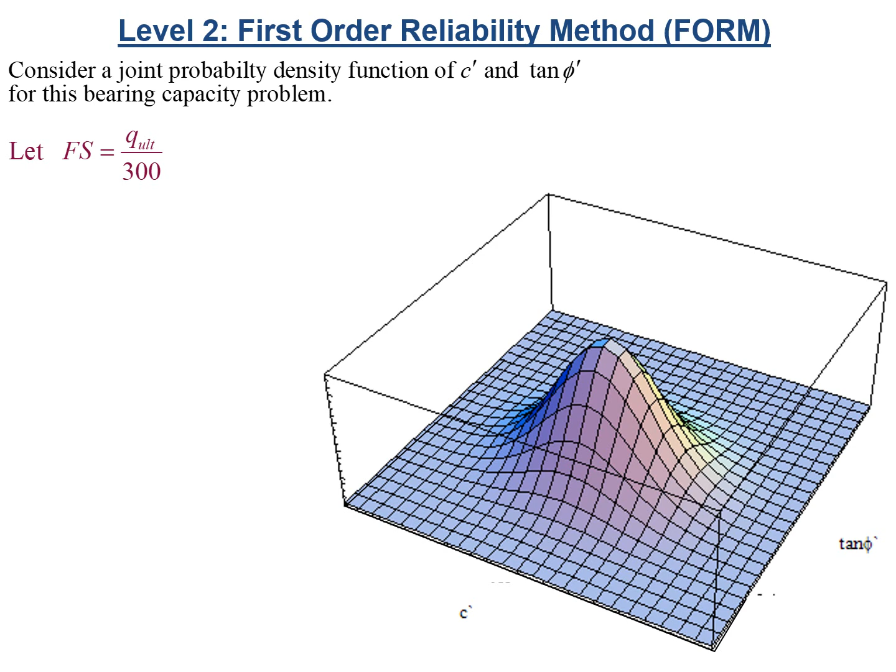Consider all the combinations of C and tan of phi that might result in failure, that might cause the factor of safety to equal 1. There's actually an infinite number of them. Some of them are incredibly unlikely out in the tails here of this hill, but you could have a huge number of possibilities that might cause failure - for example, the cohesion might be very small, or the friction angle might be very small, at a critical place under the footing.

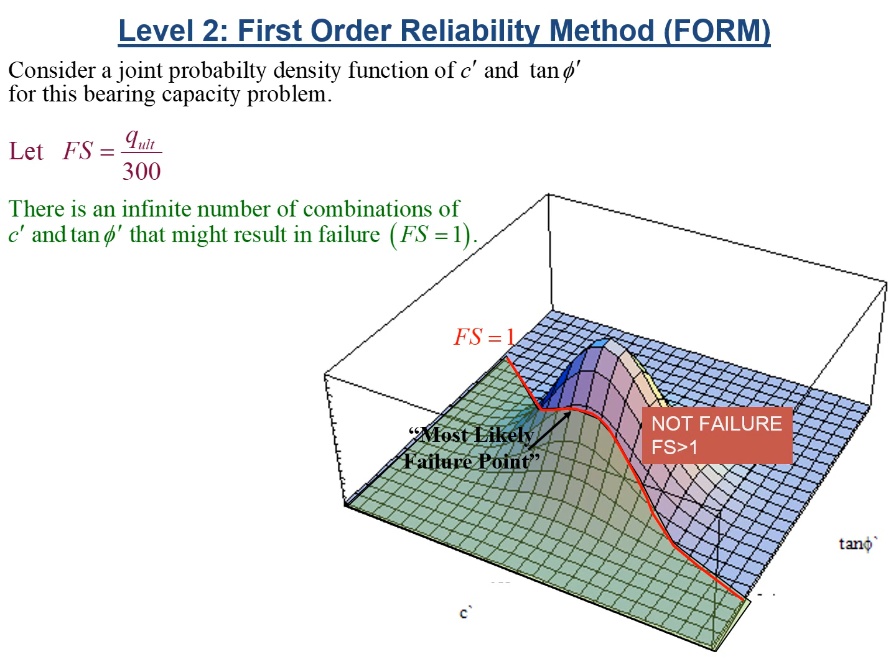So this line, which I think of like a wall cutting through the hill - the volume, instead of areas now, we have volumes. The volume of the hill on the failure side is the probability of the factor of safety being less than 1.

The volume of the hill on the safe side is the probability of not failing. Now what the FORM method does, this first order reliability method, is it finds the most likely combination of C and tan of phi to cause failure. That is the values nearest to the top of the hill. That's the first order reliability method, the most likely failure point. It could fail down here, but it's incredibly unlikely because it's a long way into the tail.

So this is actually an optimization method. It uses Excel, or if you like to use MATLAB or one of those. But Excel is what most people have if they have Word.

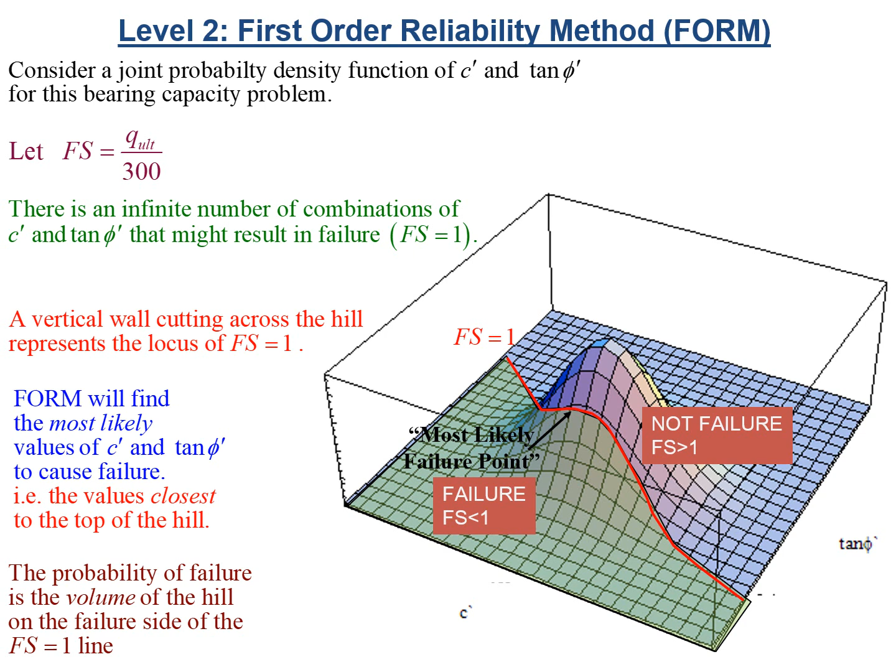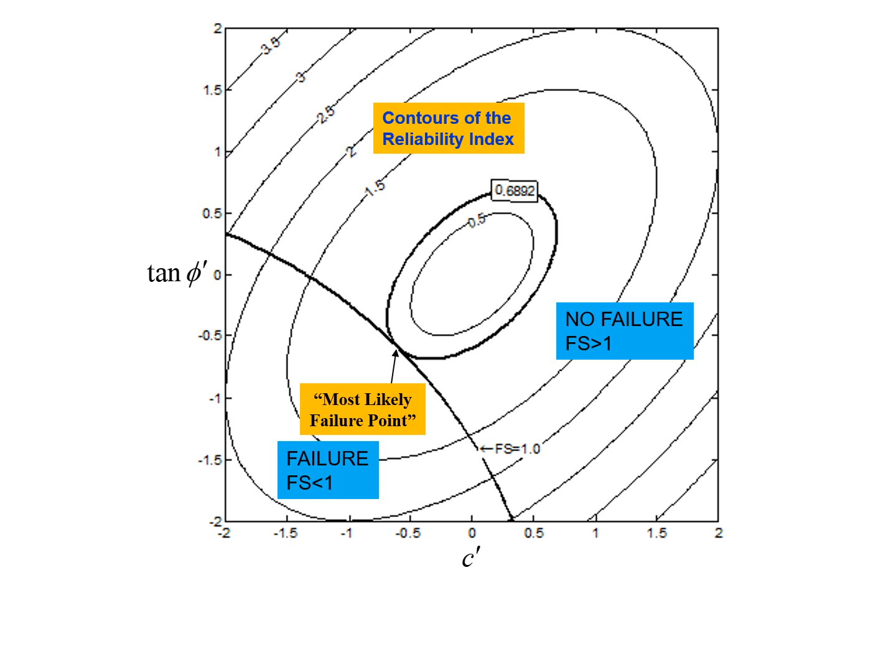These contours are of reliability index, actually. So the smaller that number, the less reliable your design, the higher the probability of failure. Just for the record, it's called first order reliability method because, strictly speaking, once it's found that point, it

replaces the actual failure line with a straight line approximation. That's hence the first order. I've exaggerated it here just to show the two lines are not the same, but in my experience, and I've asked around quite a bit, very often this first order approximation is very good, very close to the original.

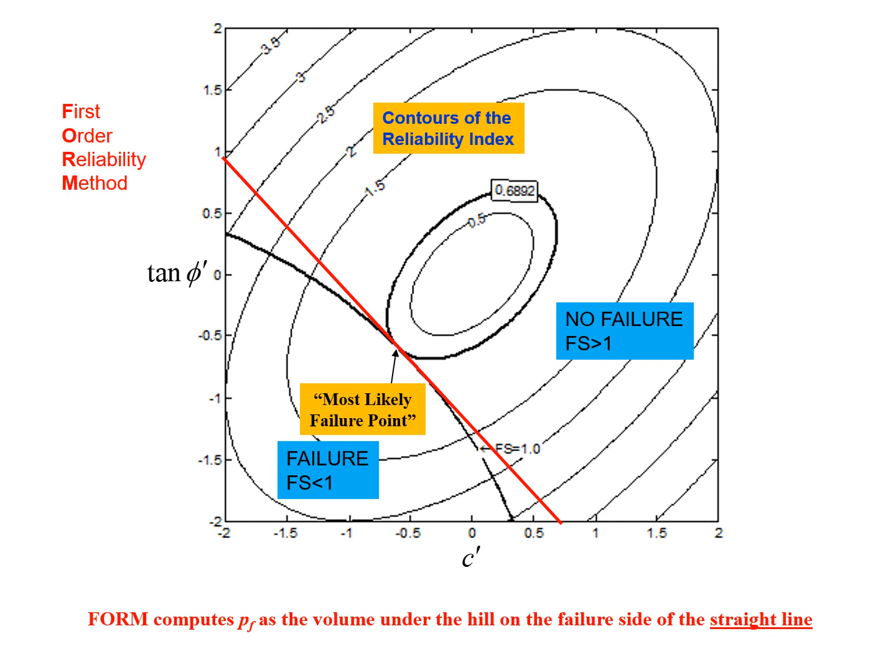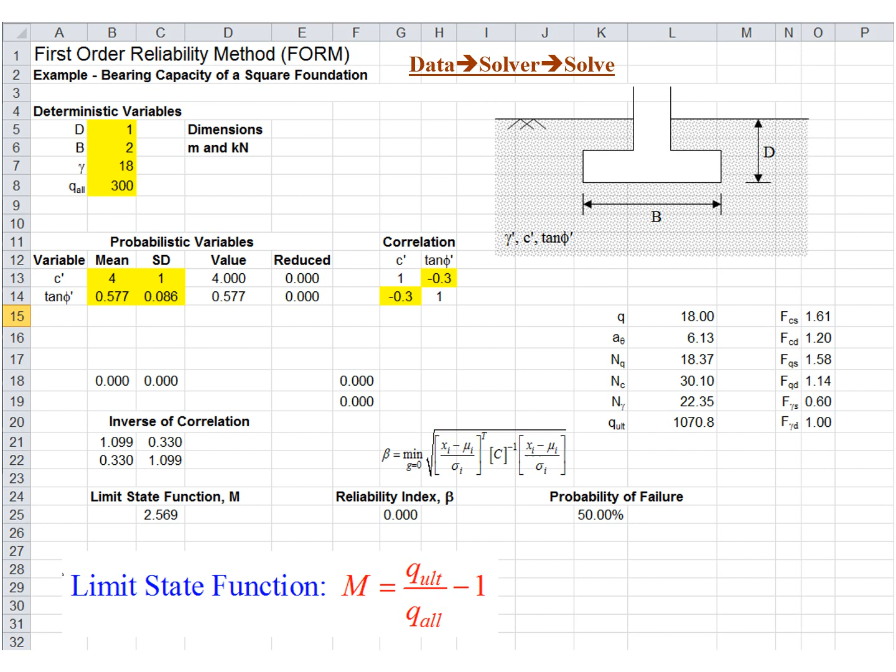The yellow numbers are user inputs, so some things I'm not treating as random variables. These are the width of the footing, the depth, and so on, which I'm treating as constants. These are the random variables, mean and standard deviation. You can change these and play with it. It's very interesting just to see how it affects the results. And here, if we have cross correlation, you can put it in. This number can lie anywhere between -1, perfect negative correlation, or +1, perfect positive. More likely, we'll just put 0 here because we don't have enough information to know if the correlation is significant or not.

If we do this data solve thing on Excel, you'll get a probability of failure. This will take a split second to run. What this is saying is that the probability of the bearing capacity falling below 300 is 0.21%, which corresponds to a reliability index of 2.86.

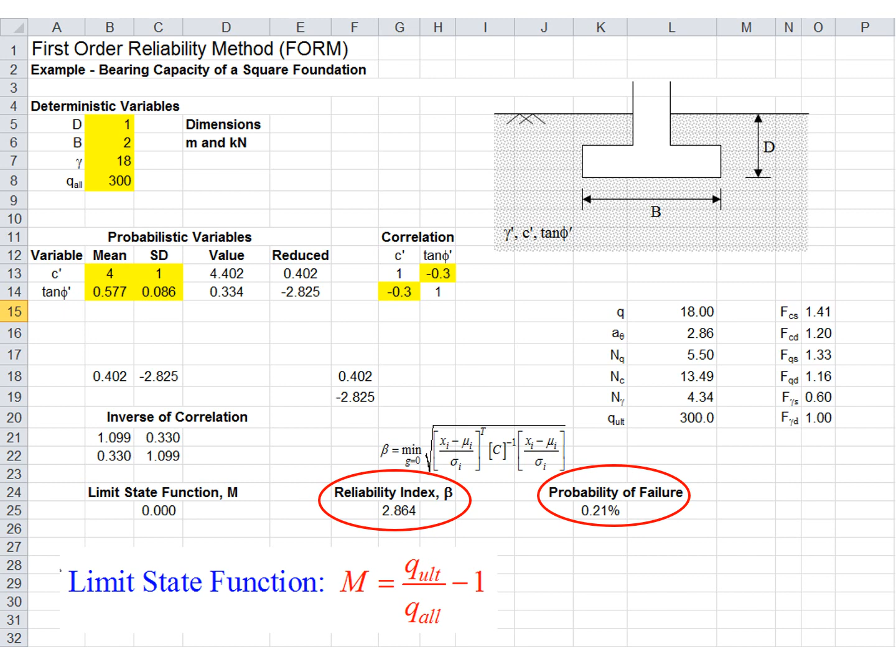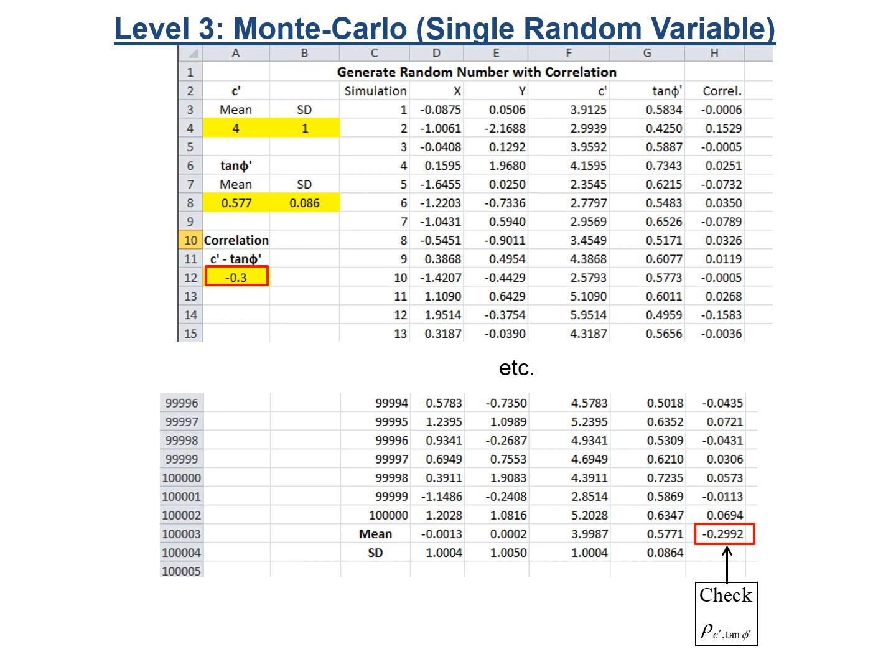So now what do we do? We take these C's and tan phi's and stick them into Terzaghi's bearing capacity formula. So we just do Terzaghi over and over again, a conventional calculation of Terzaghi. Let's not worry about that line too much. Oh no, we will. This is good.

Okay, here's the C and tan phi that I just took from the previous slide. Here's all the correction factors and bearing capacity factors in ancient Terzaghi. I'm getting 100,000 different bearing capacities. Every one is different, and the ones I'm interested in are the ones where it's less than 300. So if it's less than 300, I'll put a little 1 in that column.

And at the end of it all, well, you can see nearly everything is 0, but we add up all the ones, and we get 212 failures out of 100,000. I've left out quite a few here, you can see. We wouldn't want to look at all those, would we? So we add up all the ones and simply divide by 100,000. Couldn't really be simpler. You count how many times some event has occurred, and you divide by the number of times you repeat it.

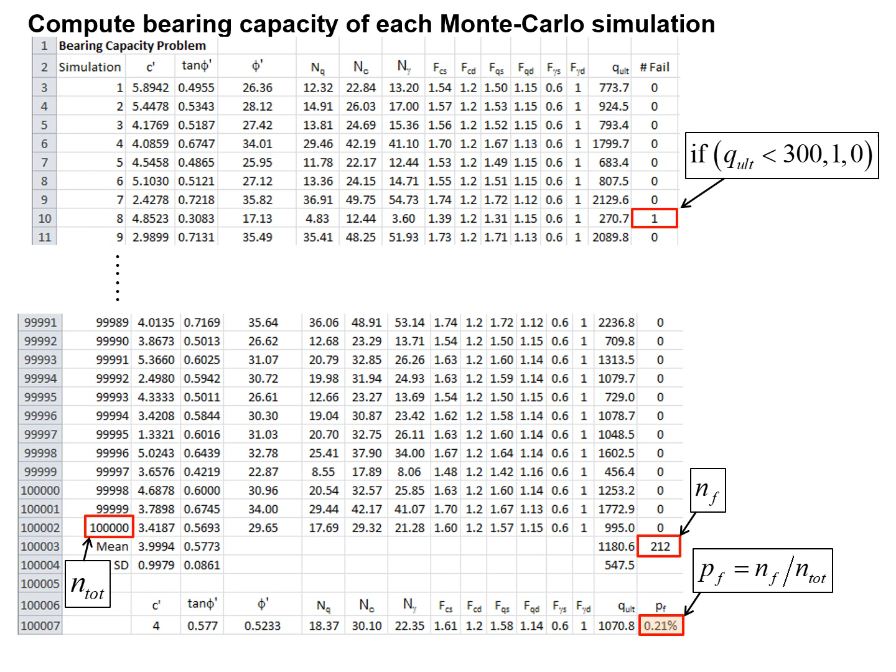The probability of failure is 0.21%, which of course is exactly what we had before. I wouldn't have shown it to you otherwise. But in this case, what this is saying is that the Monte-Carlo is really confirming that the first order approximation was very good. We didn't really know that properly until we did the Monte-Carlo, actually. There's no assumptions here. We just hammer away.

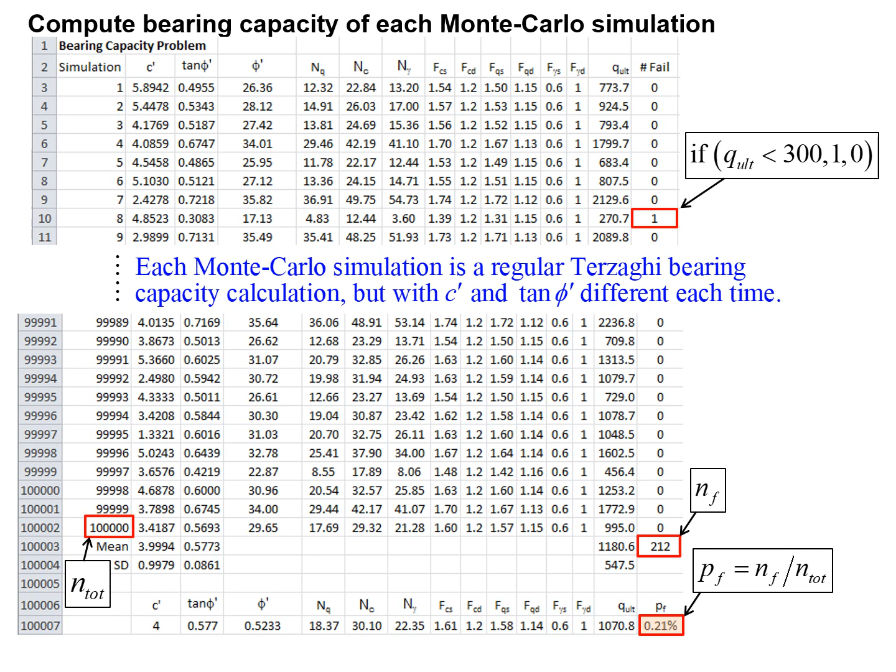Each line is an ordinary Terzaghi calculation with constant properties. Just the constant properties are different from one simulation to the next. Now, each Monte-Carlo simulation is a regular Terzaghi bearing capacity calculation, but with C and tan phi different each time. This is the example I just did, actually.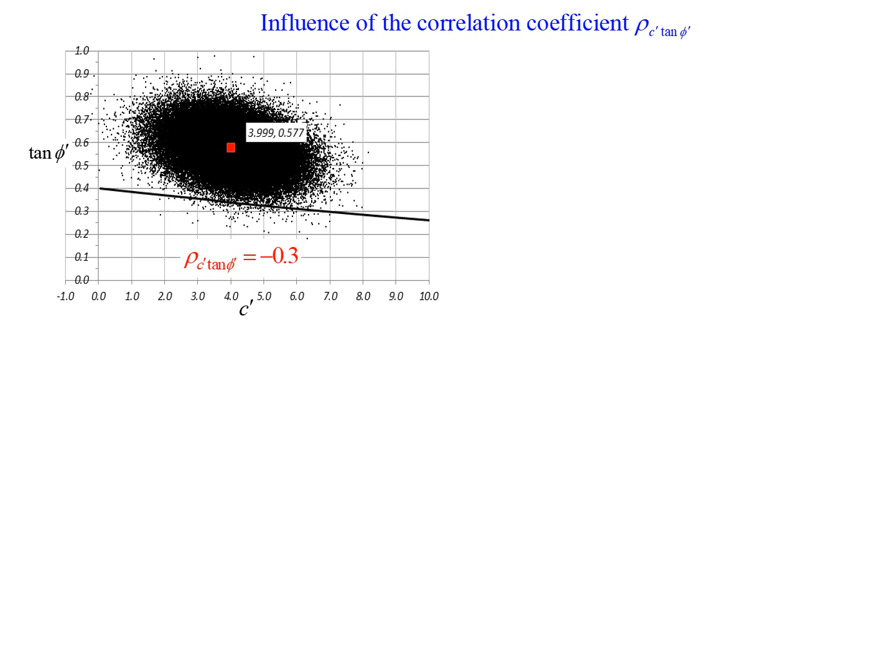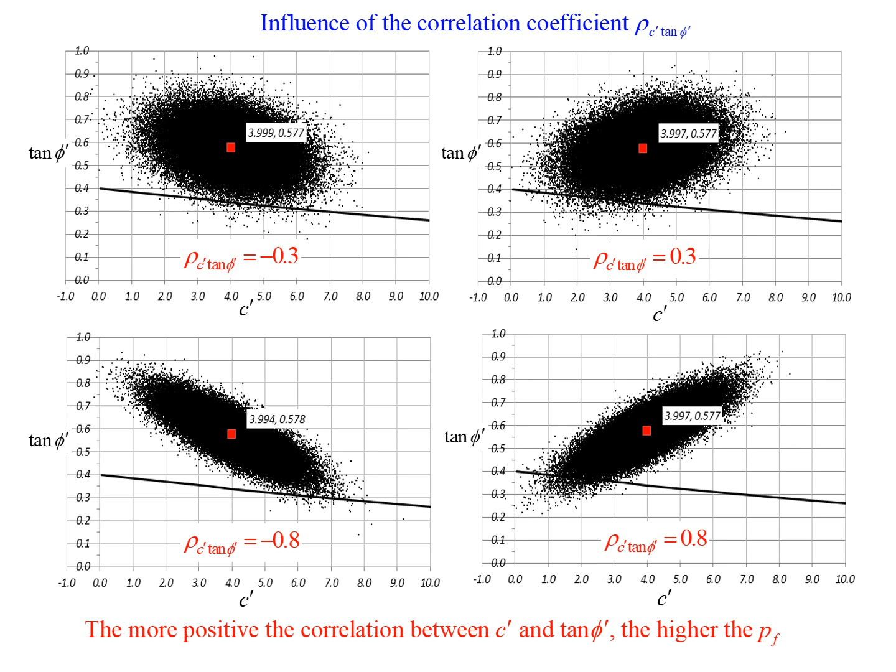It's 100,000 dots. If you change the correlation, you just get different elongations of the galaxy. If the correlation is 0, then you just get a sort of ellipse sitting on the x and y axis.

Okay, very final few words about this random finite element method, which is more of a research tool, but is also finding its way into proprietary codes. Now there's 2 or 3 that include this. This is the ability to spray a finite element mesh with a statistical distribution of properties.

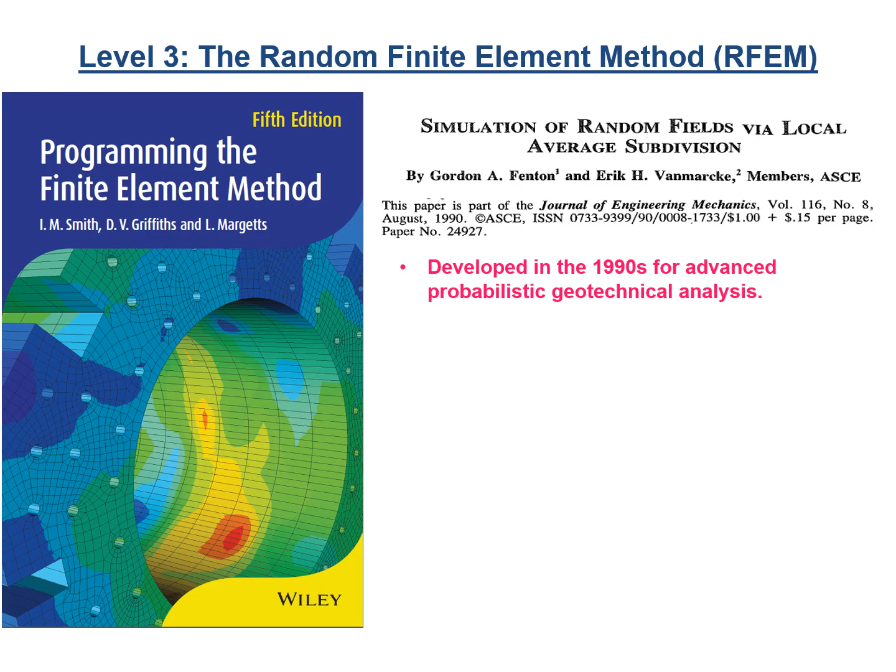It's quite old in a way. I developed it with my colleague Gordon Fenton. We ended up writing a book that describes it. It combines random field theory, which is a little mathematical for me, with finite element methods.

It accounts for spatial effects, the tendency of properties to cluster spatially. You have strong zones and weak zones. We can control that clustering effect. It takes account of finite element size.

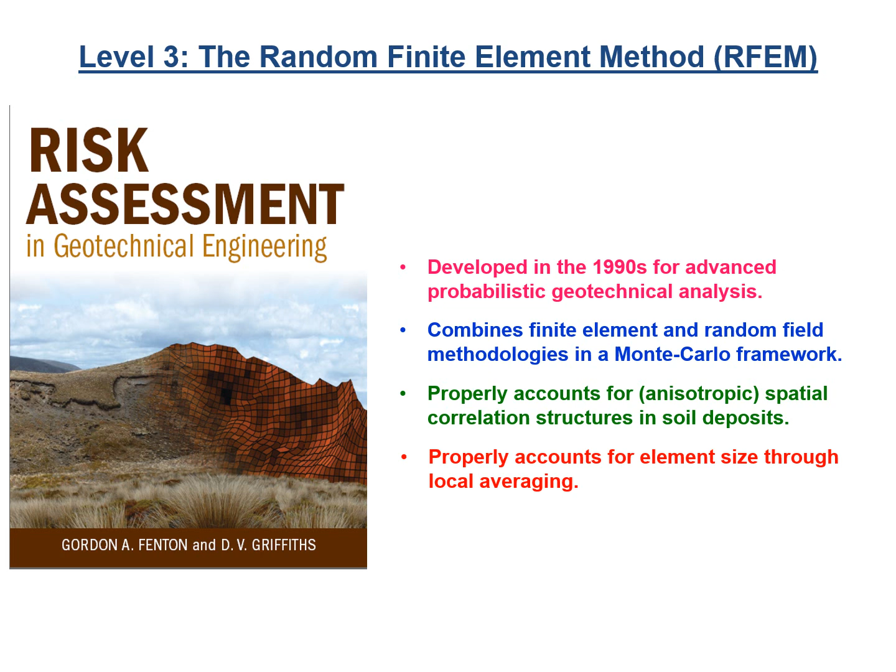It's a little bit obscure today. All the programs are downloadable from the website. Source code a lot. If you have the stomach for it, lots and lots of Fortran code there.

Gordon Fenton, who works at Dalhousie University in Canada, there have been a lot of short courses for ASCE and international, as one Pablo mentioned. And many groups are now using the method, and it's found its way into some proprietary codes. If you give it away, I suppose you can't complain if others use it and sell it.

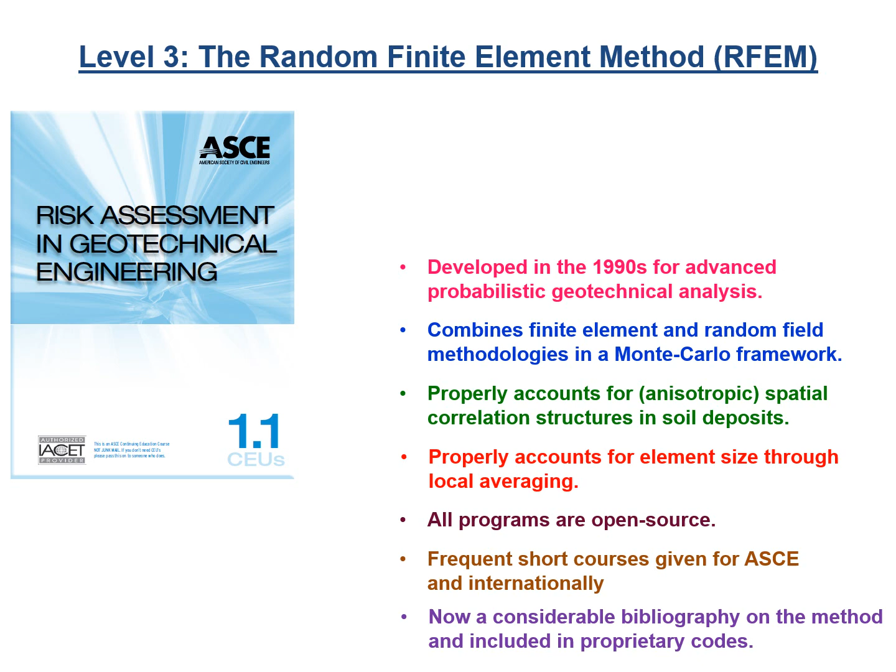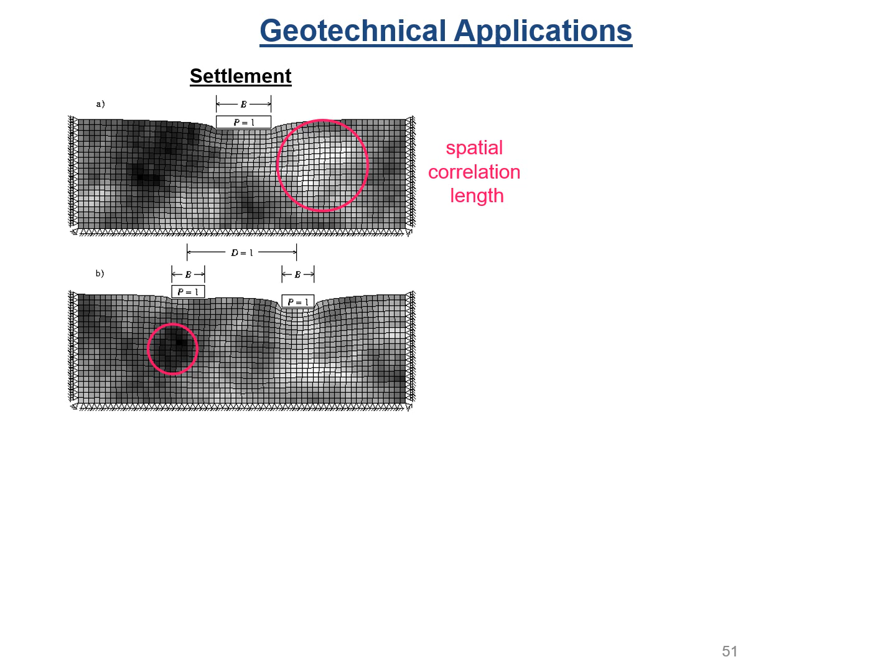The spatial correlation idea is this clustering of properties, which can be anisotropic, by the way, because that's quite important in soil layering sometimes. We can have much stronger correlation horizontally than vertically. These cases are not - these are isotropic. Mine pillar stability, bearing capacity, we already saw that.

Seepage, one of the earliest ones we did, where the permeability is now the random field. We get these wobbly flow nets as the seepage is attracted to the high permeability zones and wants to avoid the low permeability zones.

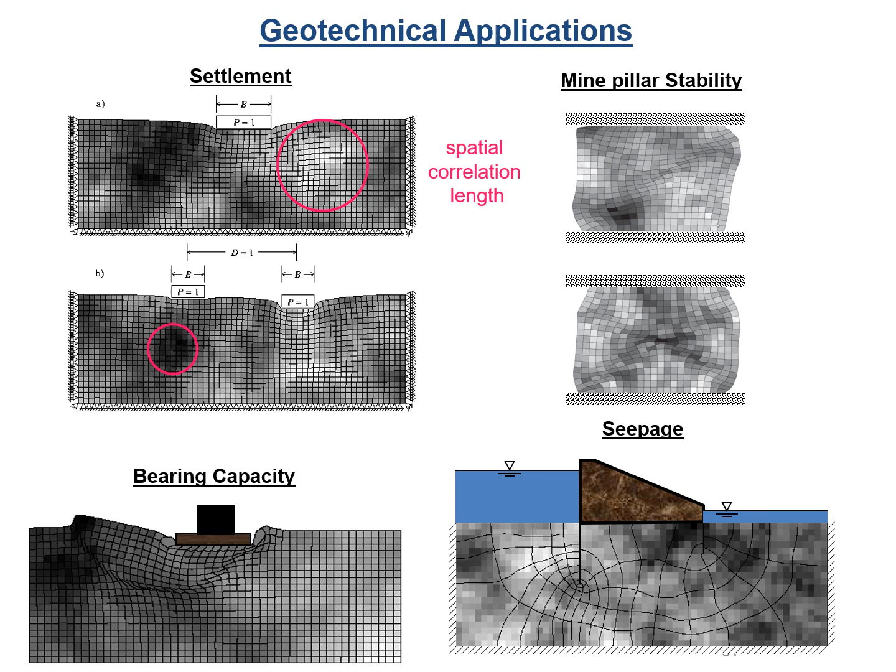Earth pressures, active and passive. You don't usually get a nice Rankine, like 45 minus phi over 2. The random field tends to attract the mechanism to the weak soil.

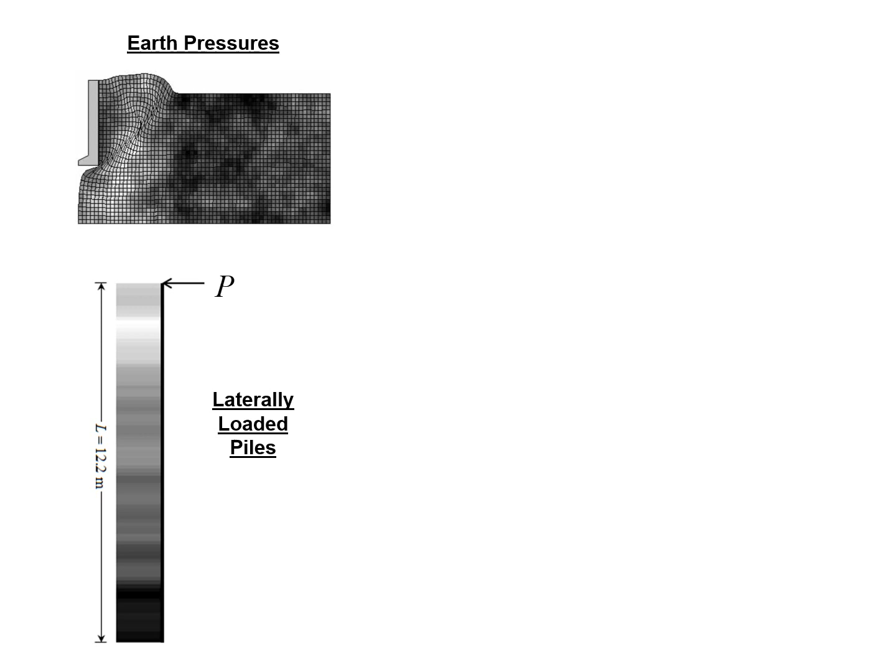We've got PY programs that have naturally laterally loaded piles with random spring stiffnesses and pile analysis. Slope stability I've talked about enough.

Here's two simulations from a set of Monte-Carlo analyses with exactly the same input parameters. But in this case, the weak soil happened to attract a very deep mechanism, and this one was a much more shallow, landslidey kind of thing.

Animation of those just for fun. Both simulations have the same statistical properties, so some of these mechanisms can be quite different in a Monte Carlo context.

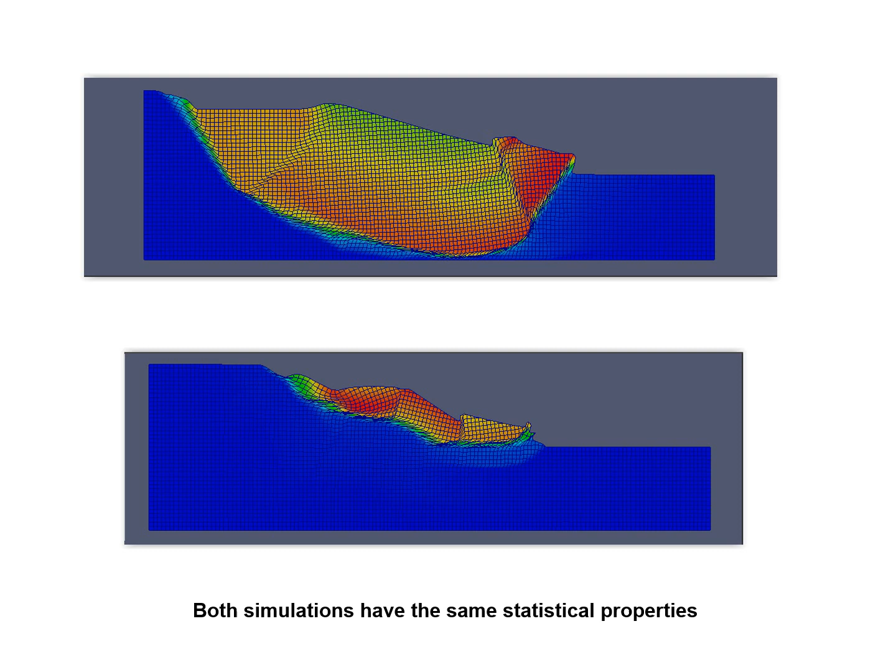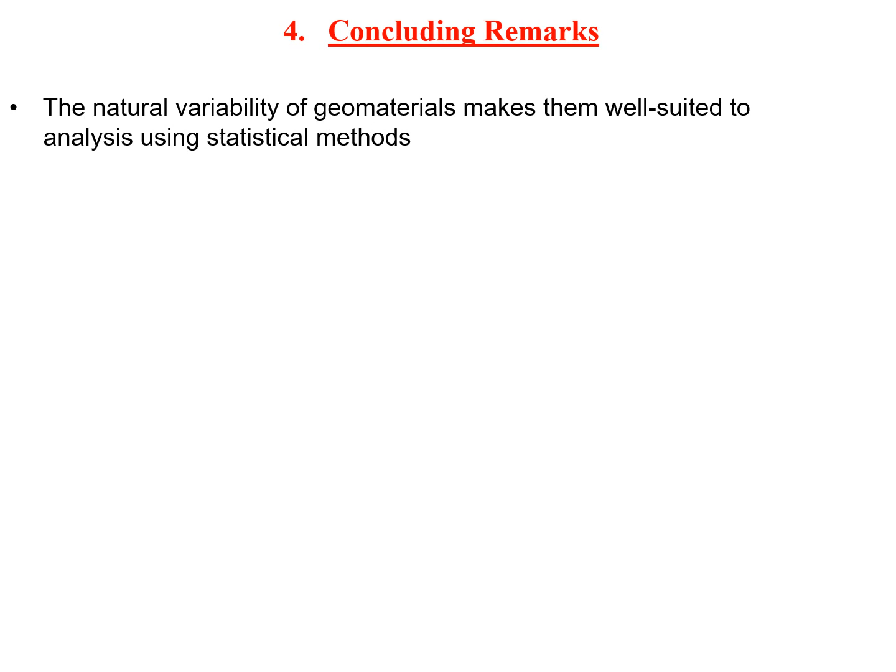All right, let's wrap up a few concluding remarks here. The natural variability of soil and rock makes it well suited to a statistical approach for defining properties. Instead of a characteristic value, as we perhaps do in a traditional approach, we will actually recognize the variability with a normal distribution. We often use a log-normal model, but that's another story.

Numerical methods, like the finite element method, like the finite difference method if you're a FLAC devotee, are really the most powerful methods for dealing with this variability. And in highly variable stability problems, these methods allow the mechanism to seek out the weakest path through the material. We don't necessarily get nice circular mechanisms.

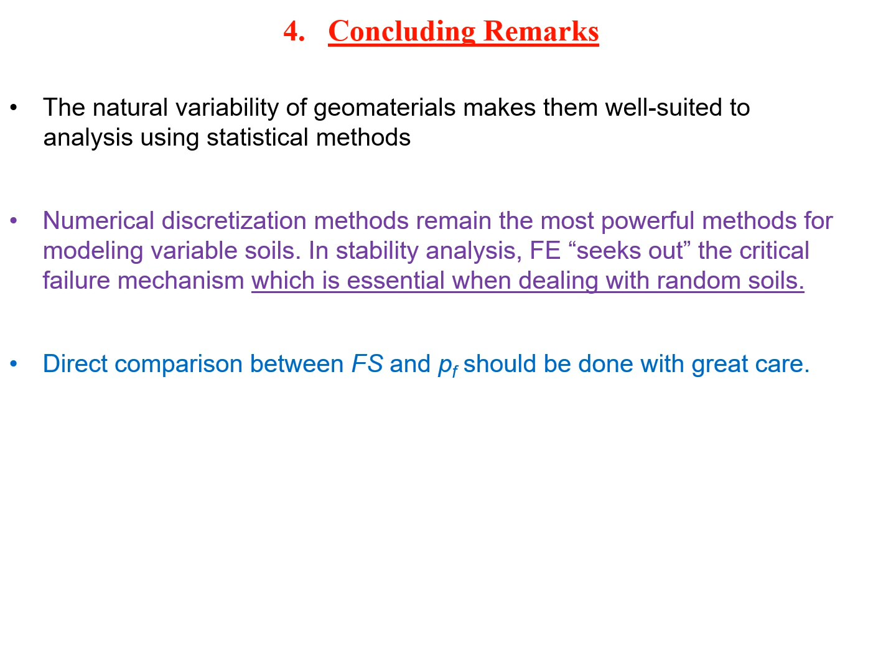We talked a little bit about factor of safety and the probability of failure. We should not compare them in a cavalier way. We should recognize that these are quite different things. Factor of safety is one number, whereas the probability of failure involves at least two numbers. They're not directly comparable.

Geotechnical engineers have a toolbox of methods for probabilistic analysis, and we've touched on event trees, first order methods, and Monte-Carlo. And when Monte-Carlo is combined with non-linear finite element analysis, the analyses can take days. So we're into a different world then.

But there are some very powerful, simple methods, I think, that get you started and enable you to do parametric studies that will at least get you into feeling how parameters affect the result—how sensitive the output is to input parameters.

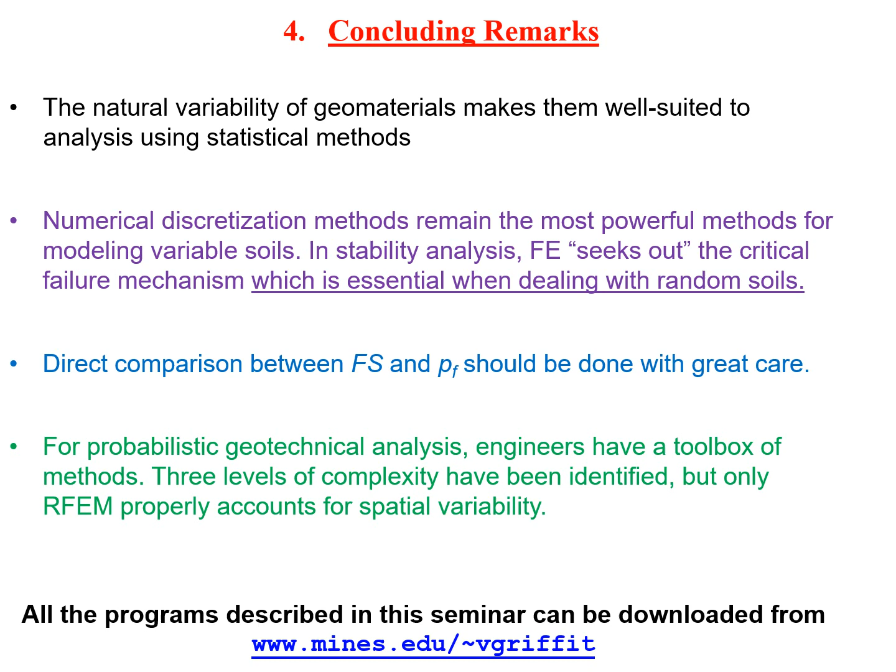Thank you very much for giving a very intuitive guide through a very complex field for us, and using plain language to give pragmatic examples and potential examples. We're running on a little bit, but if we have time for maybe one or two questions, I don't know if there's any pressing questions.

Thanks for a great lecture. Two quick questions. First of all, how many measurements of the friction angle—I know we used the shallow formation example—but how many measurements of the friction angle would you need for a statistically significant distribution? Secondly, which friction angle do you use? Next question, you can ignore the second.